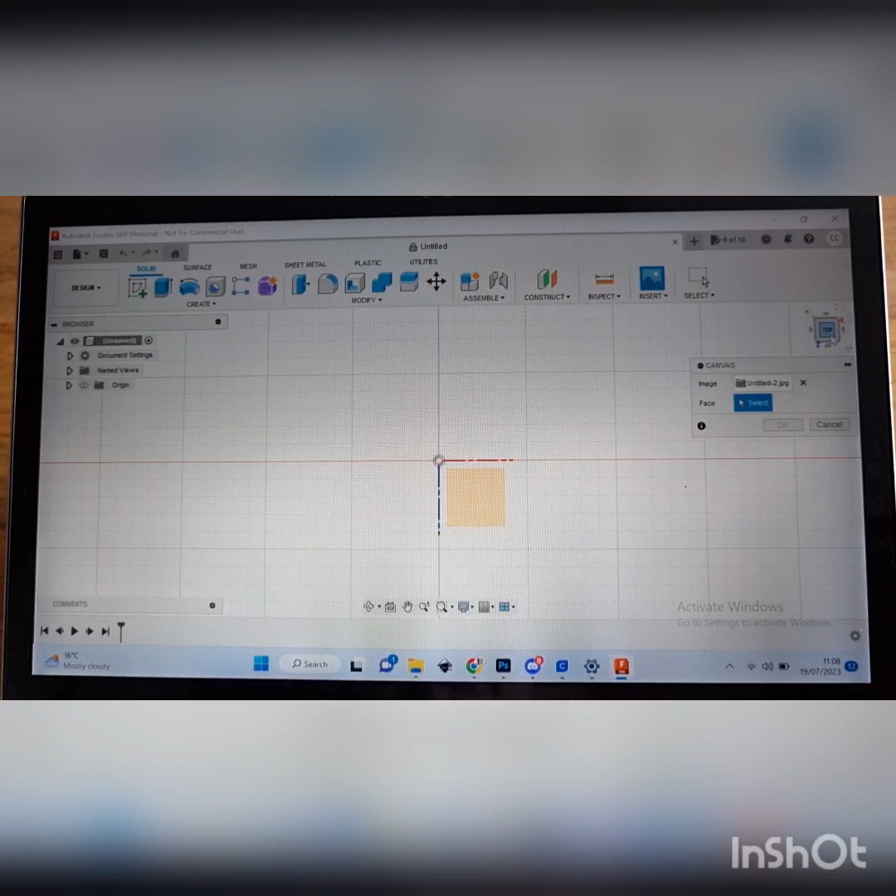Now the first thing that pops up is this canvas dialog box, and we need to select a plane, which is this orange square here. The reason I went to the top of the cube at the very beginning is just to make this step easier. So we press on that one and it does drop it in here.

We don't need to worry too much about the size just yet, but I like to make it big enough so we can see what we're doing, and we can perhaps rotate it 90 degrees so that it looks like a leaf, and select OK.

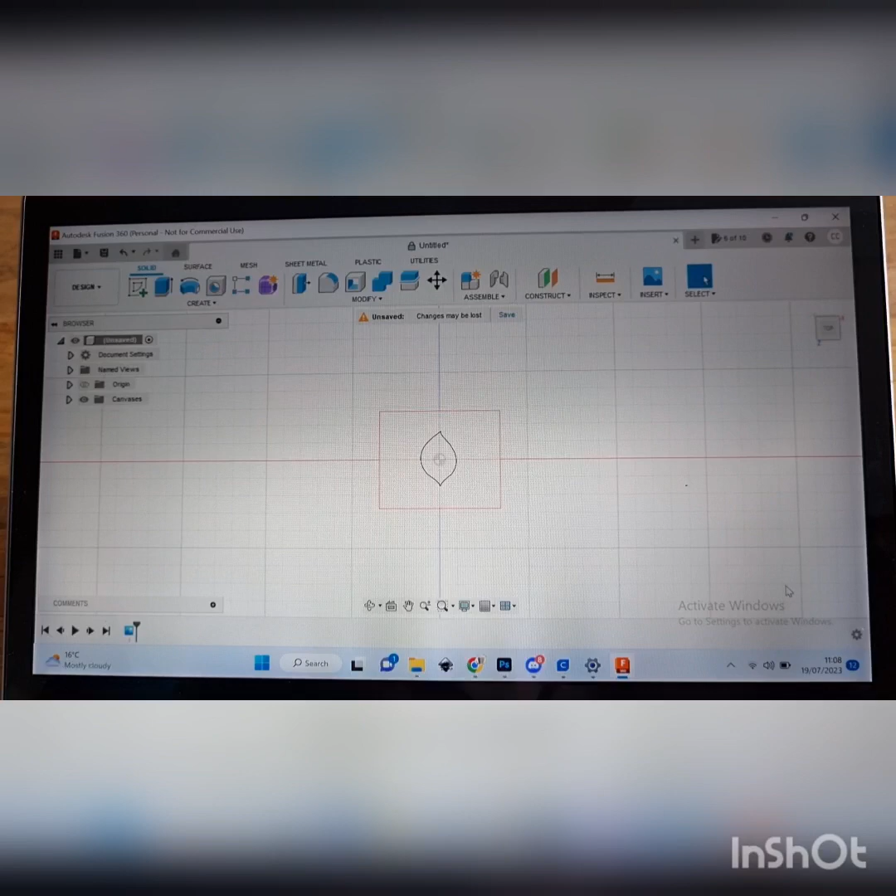We can scroll in using the mouse button, but you can see it goes off the page. So if you need to move something around, you can go to this little hand symbol, select that and pan, and you either click off onto the screen to get rid of the pan, or you can press escape.

The next important part I find is actually calibrating the size of this. Fusion is quite tricky to resize things, so I like to do it at this stage. If you know this particular leaf you want to make, say, 35mm long, there is an easier way to do that in the canvas section before we start doing any drawing.

So just on this left hand side we click the little arrow next to canvases, and you can see we've got Untitled 2, which is our leaf. We right click on that, calibrate, and then you get a little crossbar here.

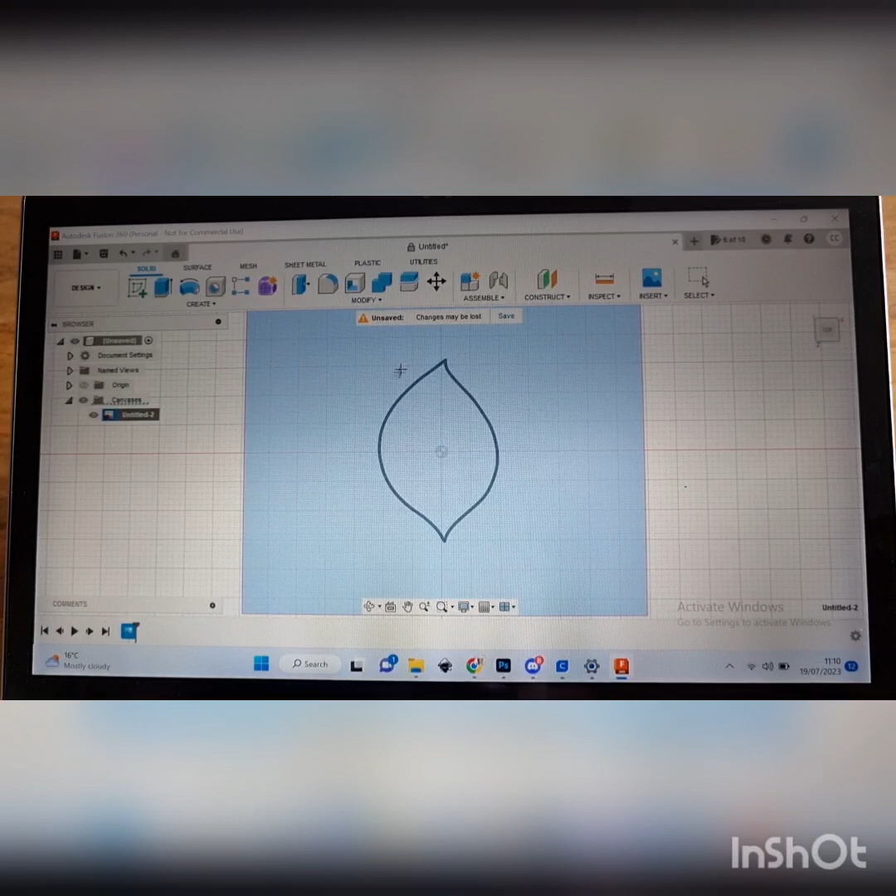So you pick the top with a click of your mouse and the bottom, and at the moment it's saying 31.68 blah blah blah millimeters. So for this tutorial I'm going to say we're going to make this 35mm tall. All you do is type in 35mm, press return, and hey presto, that's your size.

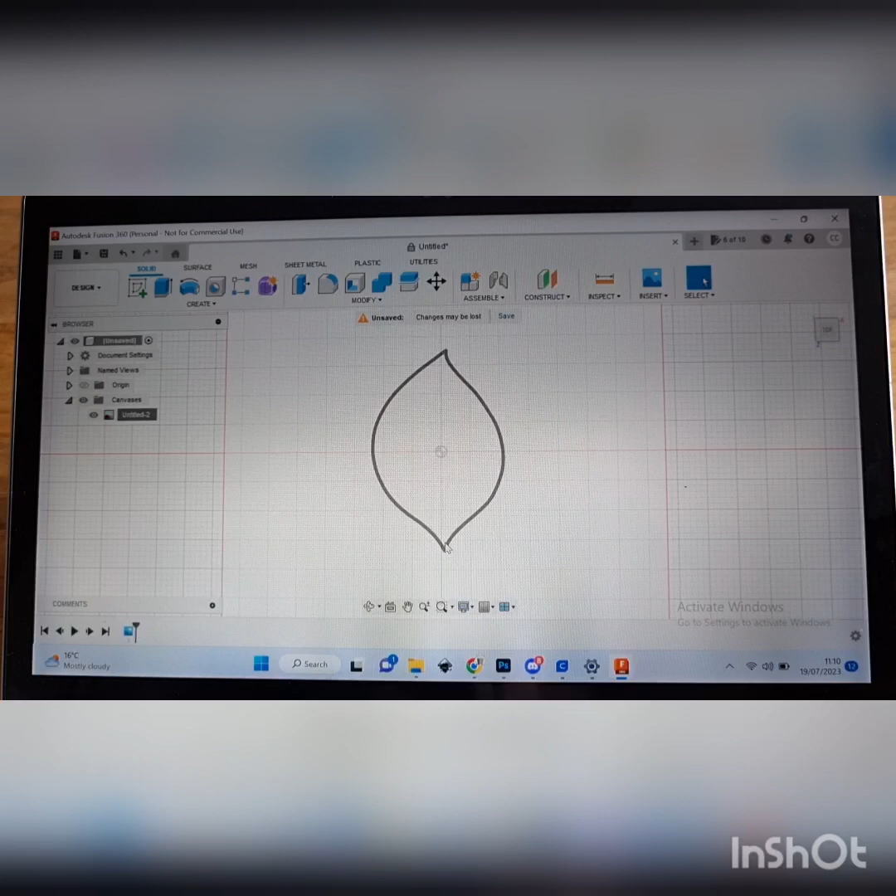The next bit's the fun part. This is where we do what Fusion 360 calls a sketch. We need to go up to here where it's this little box with the green cross, and select that. Again, it's giving you this little orange box.

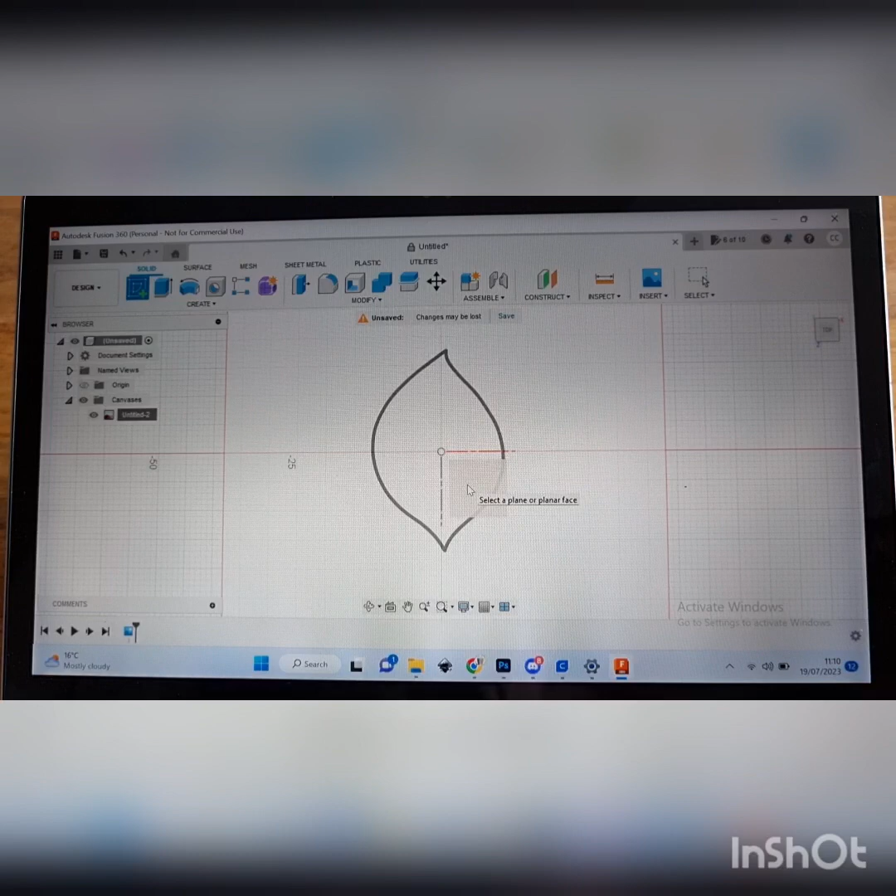This is the plane we're going to be working on. It's a bit like a layer, if you guys are familiar with that on perhaps Photoshop or something like that. But for the purpose of this video, we're just going to select this plane, which means we're going to be working on top of this leaf drawing.

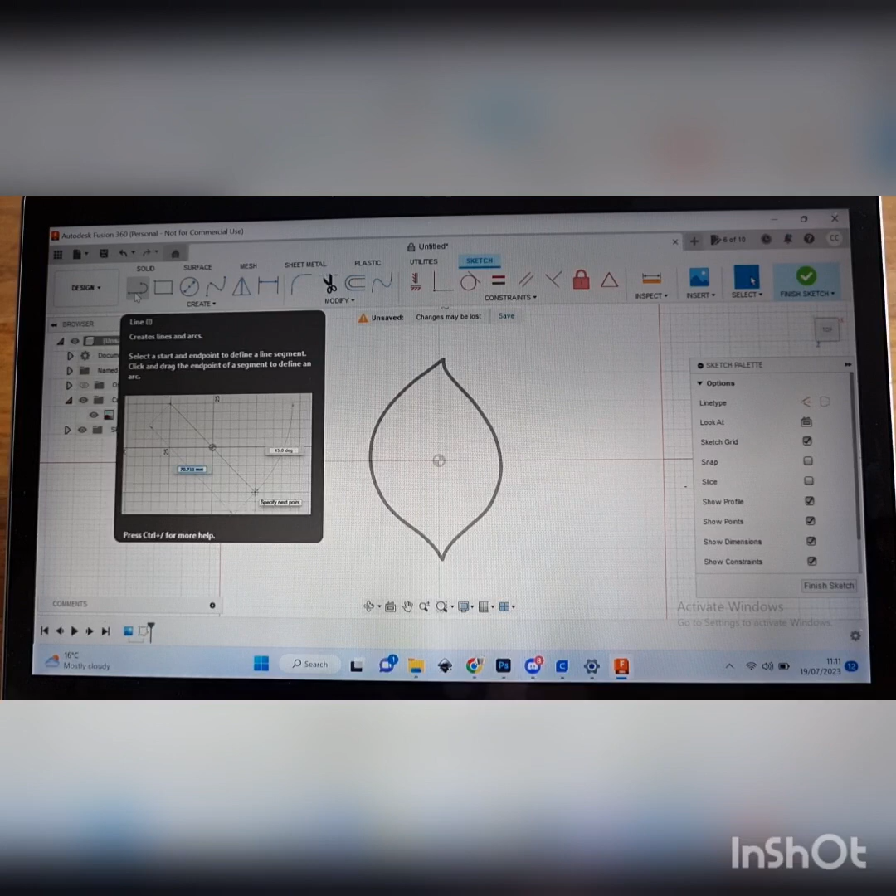Now you do have a sketch palette, mine has disappeared for some reason, so we're going to click on those arrows, and this is our sketch palette, giving us a few options. If we head to the top left here, you'll see we've got a line, a box, a circle, a fit point spline, which we'll be using in a moment, a mirror, which I'll go into, and the sketch dimension, which I don't personally use very much.

For this one, we're going to choose a fit point spline. This is what you would do for any kind of weird curves or anything interesting like that. So select this one.

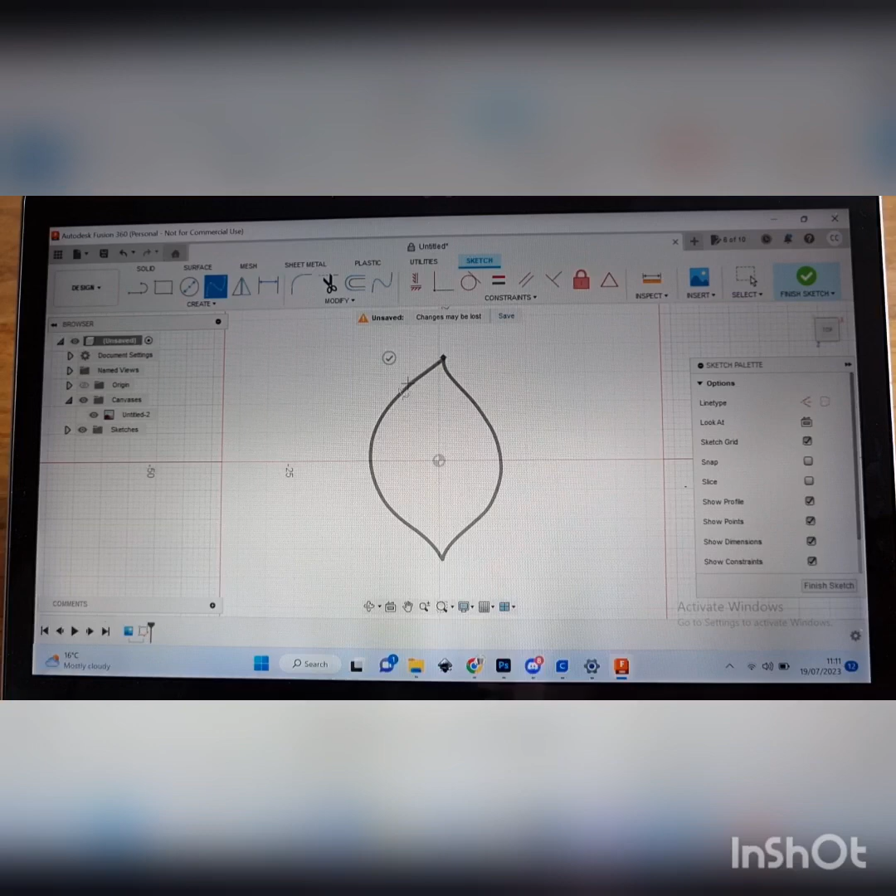What we're going to do is head up to the very top and press with our mouse to do one point. It depends which way you want to go, let's go this way to the left to start with. What you want to do is click and trace the outline. You'll probably see that it's curving as you go, so try, anywhere there's a curve like there, to go in the middle of it because then it will bend backwards.

Scroll in if you're struggling to see or it's doing anything silly. You can adjust these in a moment. So when we get to about this point here, we're going to double click with the left hand mouse, and that's going to stop our fit point spline.

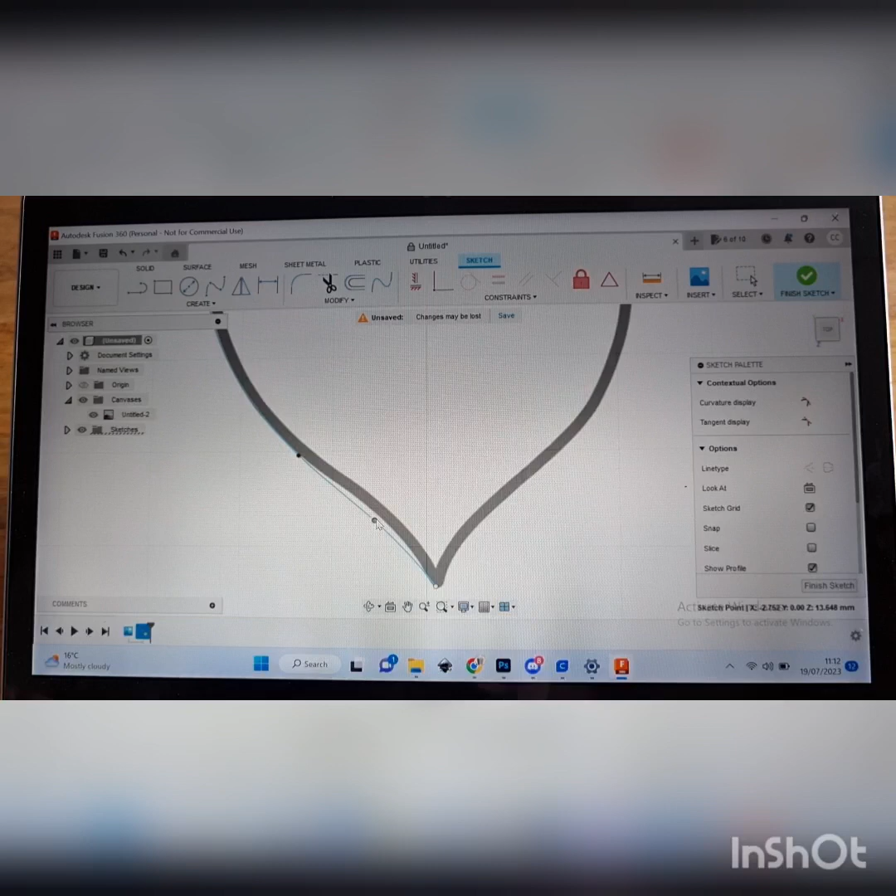If we press escape at this point, you can grab and pull these about a little bit. Again, use the pan tool if you need to, just to see.

Escape to come away from the pan tool, and maybe just drag that a little bit to get that perfect line. Okay, we're happy with that. Escape again to get rid of the pan tool. So we need to do another one for the other side.

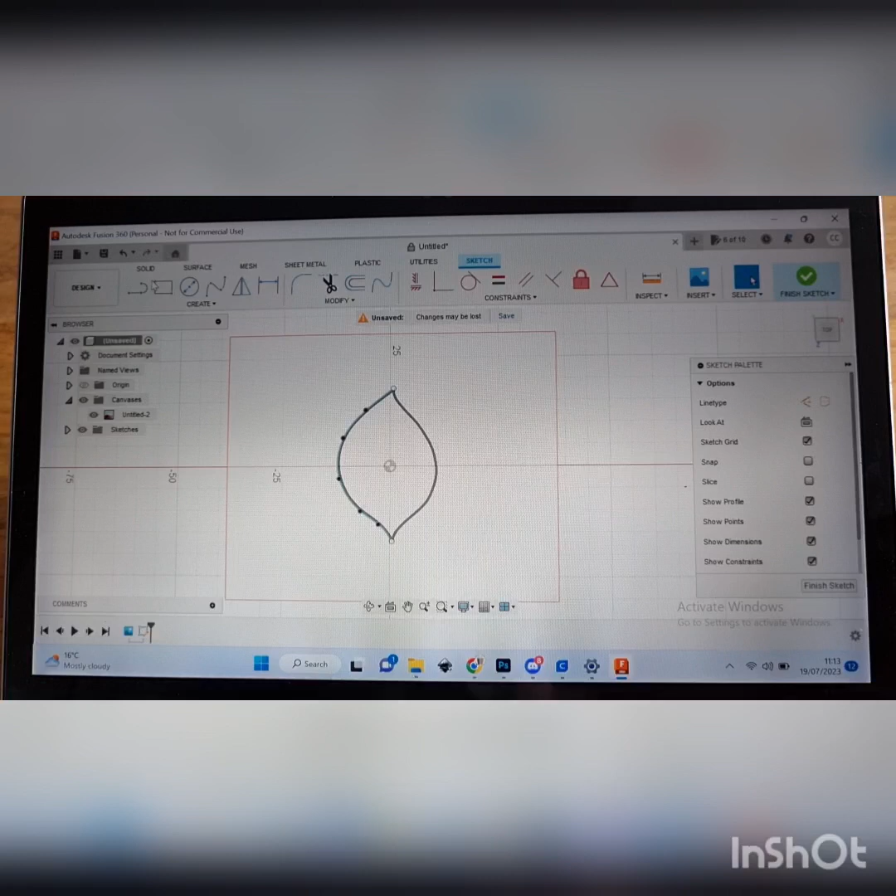But just before we do that, I want to mention you can do a mirror if you wish. If we use the mirror option, it won't trace the canvas exactly, but it will make it symmetrical. For this purpose, we can choose the line, and it will snap to this little centre point, which makes it a little bit easier. So I would go from here downwards and just click till you have a solid line, and escape if it tries to draw another line.

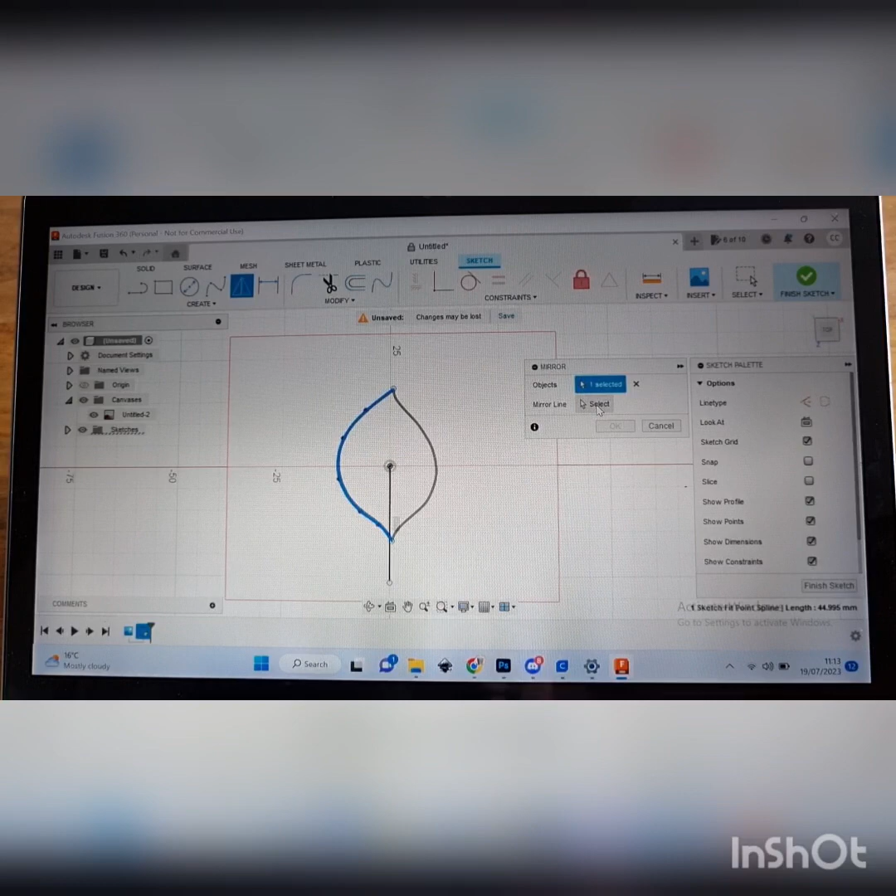Then we can choose the mirror function, select the object, which is the blue wavy line we've just drawn, and the mirror line, which is the black line. If we just hide the canvas, you can see it's drawn this leaf shape. At this point, you could have pressed OK if you wish, if you're happy with that. We could trim off those two funny bits at the top and bottom, and that would be your leaf shape complete. But I'm going to cancel that.

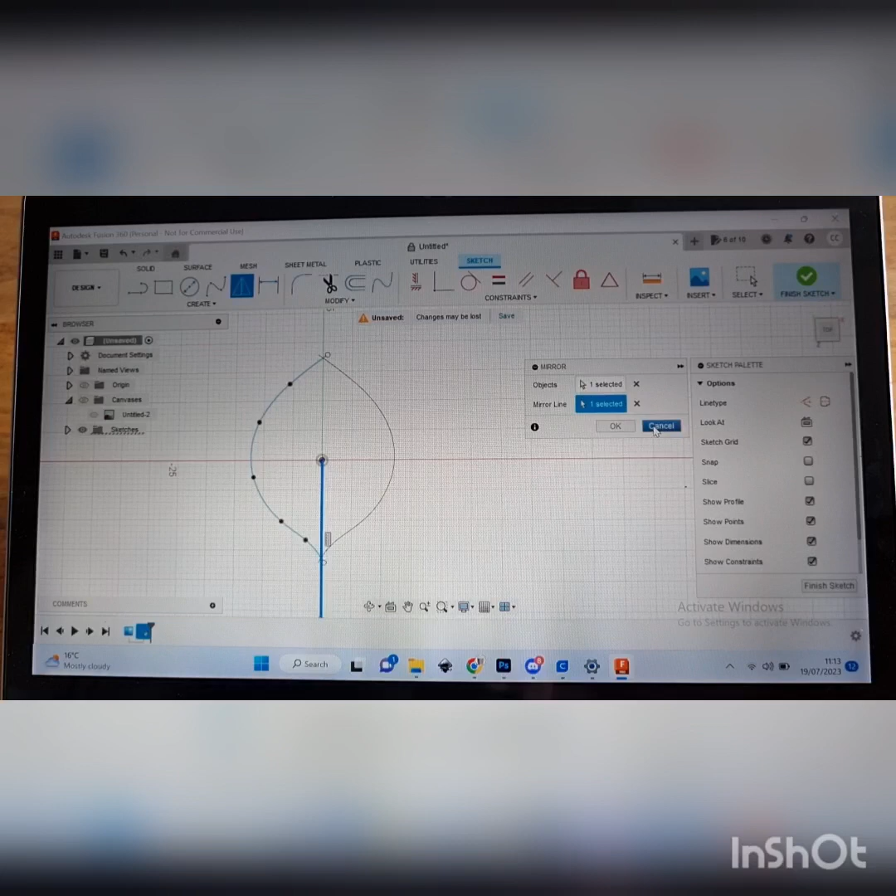And what you can do is press Ctrl and Z if you want to go back a step or several steps.

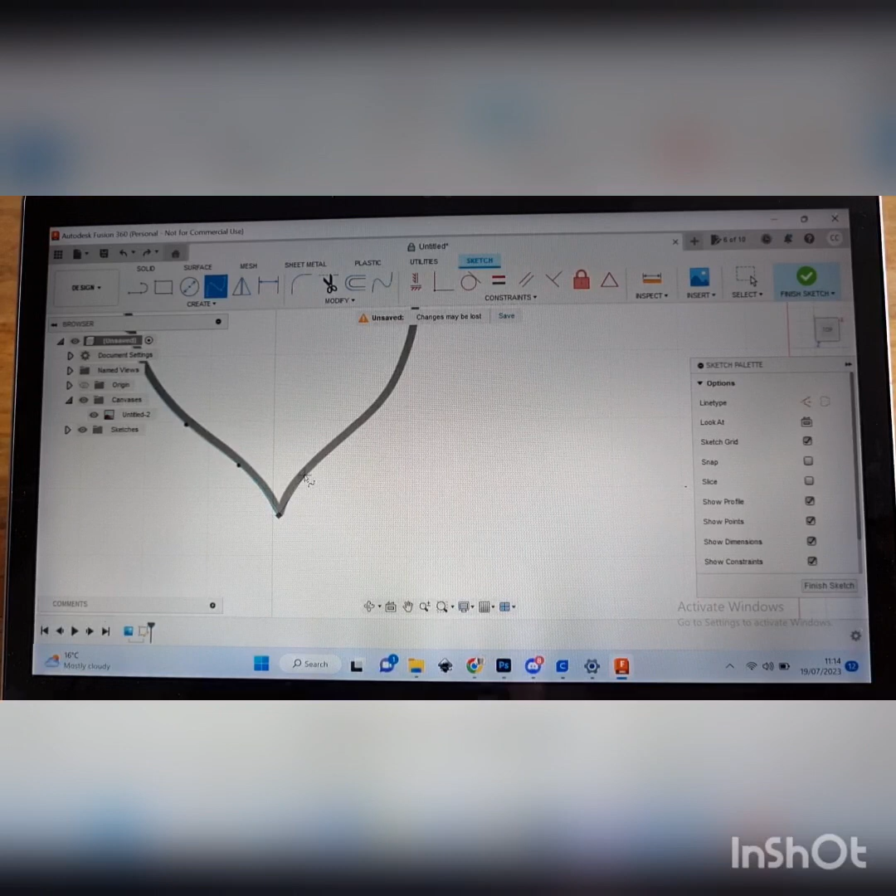So we're going to continue on with this funny leaf shape. Again, we're going to choose the fit point spline, and go back to this white blob here, and it will snap to it because that's where we started from. You can click on that, and again we can start working our way around that shape.

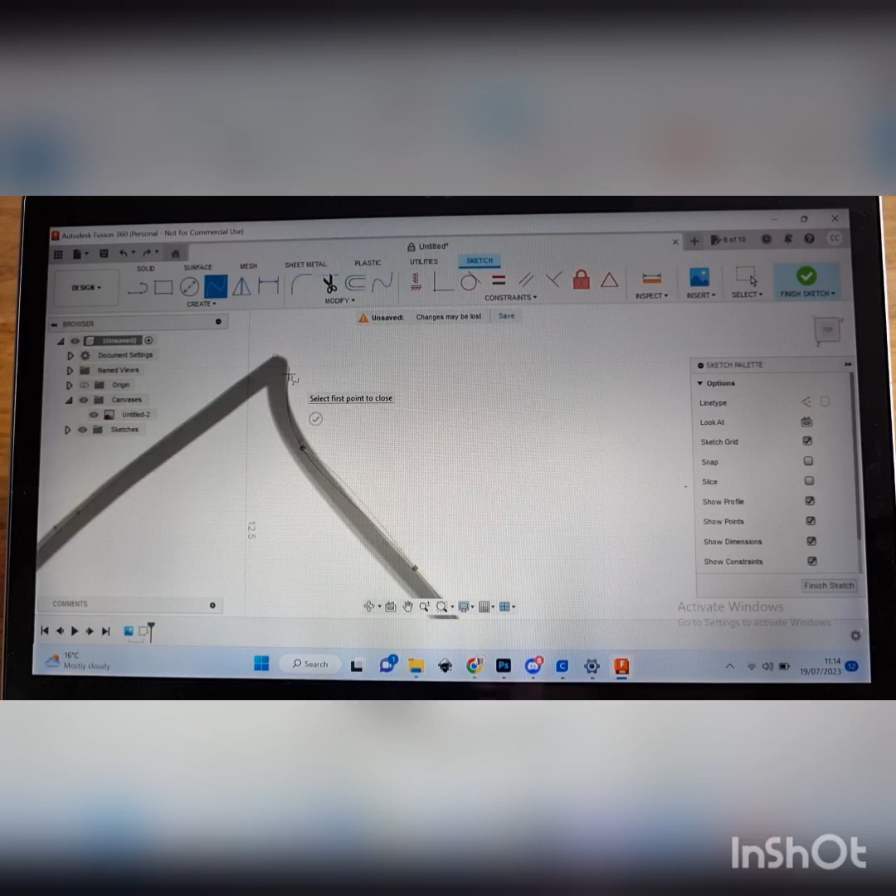You can still move to the pan tool and escape out of it if you can't find where you're going, and sometimes you need to drag it quite a long way to get that curve. If it's a long piece, or a short bit like this, you might have to fiddle about with it. It doesn't actually matter if it goes a little bit off the line, it's not the end of the world. But when you get back to where you started, to that little white dot, you can double click, and that gives you your line.

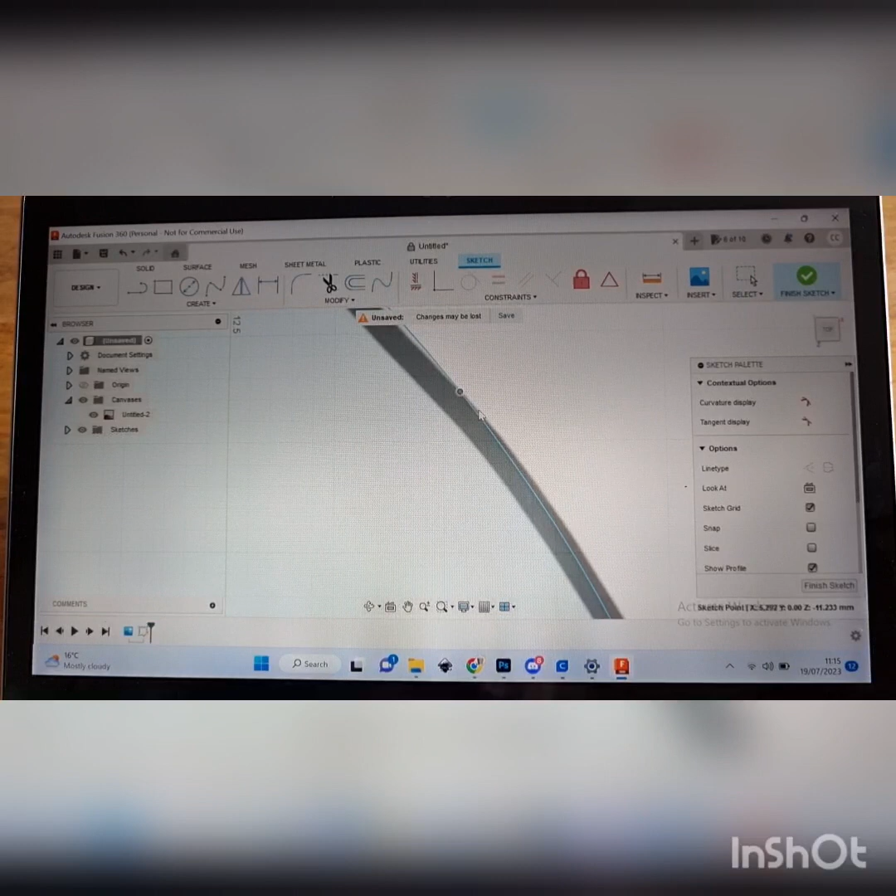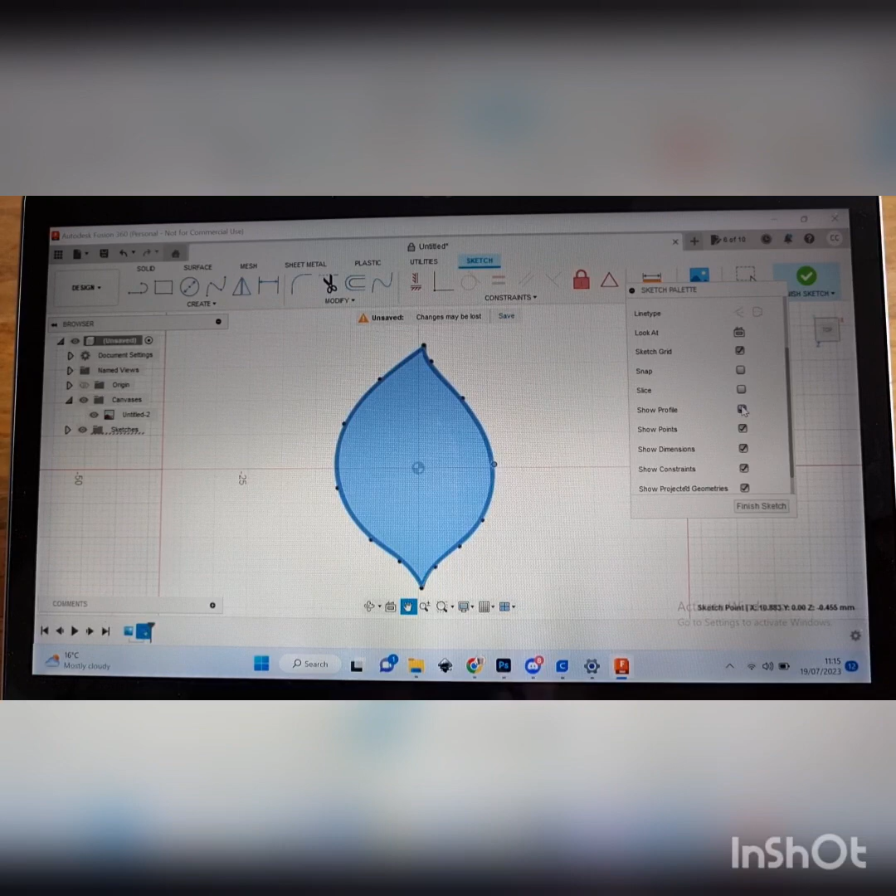If we press escape, we can go to that node and start adjusting our shape, making sure we're happy with it. You might need to drag them a little, or faff about a bit to get the shape vaguely where you want it. You'll notice it turns blue as I hover over it. That is because the show profile box is ticked in this sketch palette, which is really handy sometimes but not always, and we'll go into that in another video.

So I can press escape at this point, and we can also hide the canvas, and this is our shape. If you want to see it without the little black dots, you can untick the points box, and I think that's quite a nice little shape to deal with.

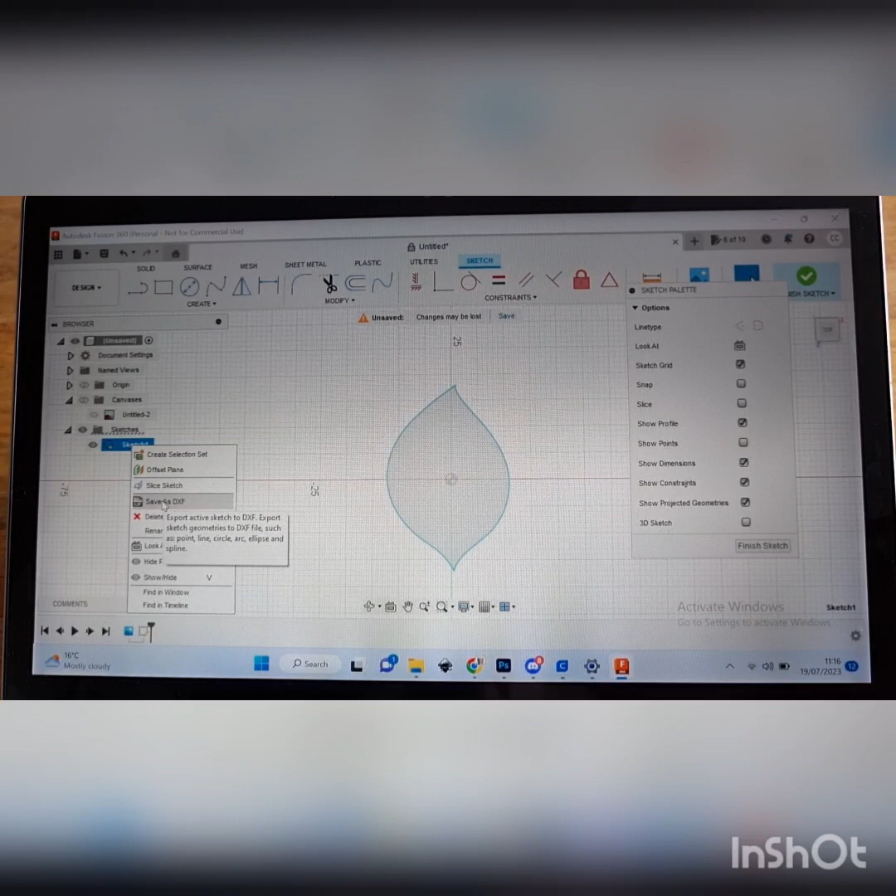So that's it for the shape, apart from one thing. Now this is the most important thing. You need to open the sketch palette by pressing that little triangle, and right click on sketch 1 and save as DXF. This is by far the most important thing you will find if you ever want to reproduce this shape, or make another one that's smaller or bigger. This is absolutely crucial.

So click Save as DXF, and you can give it a file name, Leaf1. Put it wherever you like on your computer, perhaps make a sensible folder for it, but save that as a DXF, because if you ever want to make it bigger or smaller, like I say, you are going to need that shape. But today we're just going to make this one.

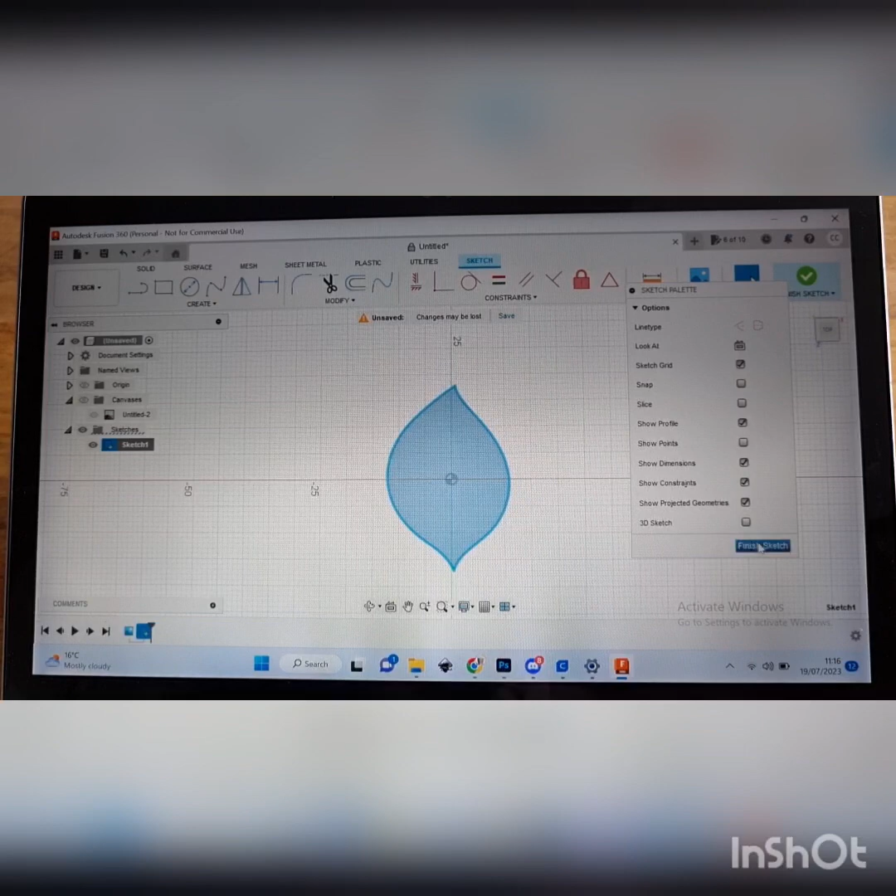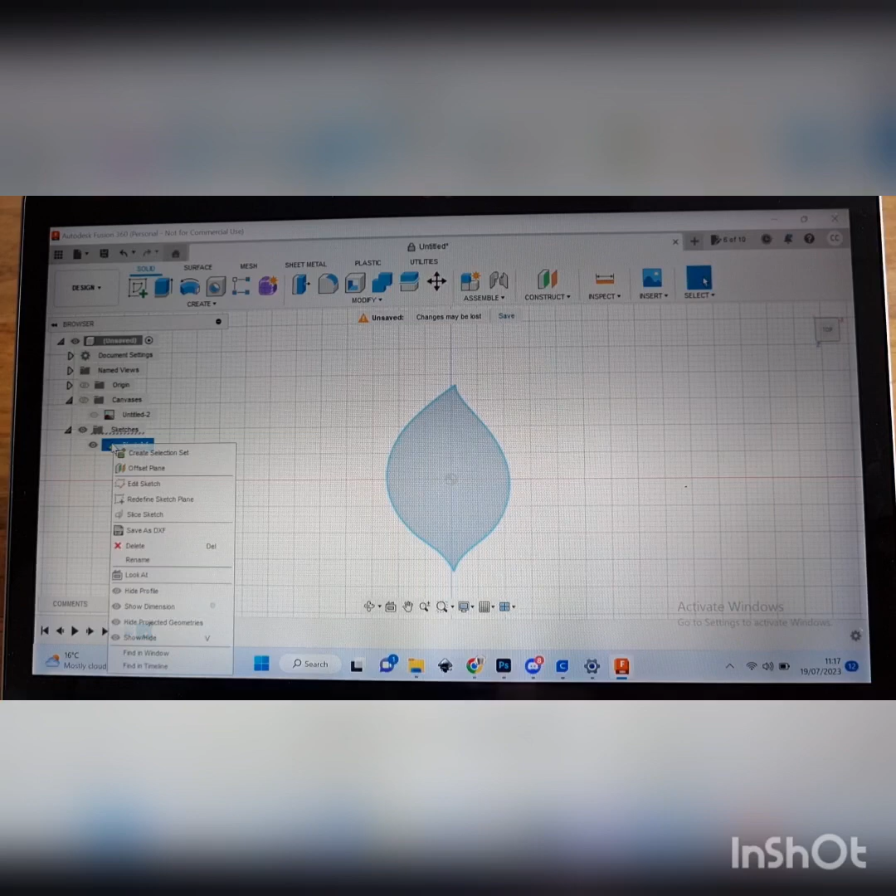Now if I've pressed finish sketch, you'll notice all of my little tools have disappeared, and you think, oh, I want to go back and do something. What more can I do? You need to go back into the sketch, so right click sketch 1 again and edit sketch. Sometimes for some reason this menu doesn't come up, so if it doesn't, press the little eyeball twice and do it again. Don't ask me why, it's just something I've found.

So we're going to use a new tool. This is how we create the walls. Now I like to do 3 walls: the cutting blade, then a wall to support that, and then the base. So I use the offset for this.

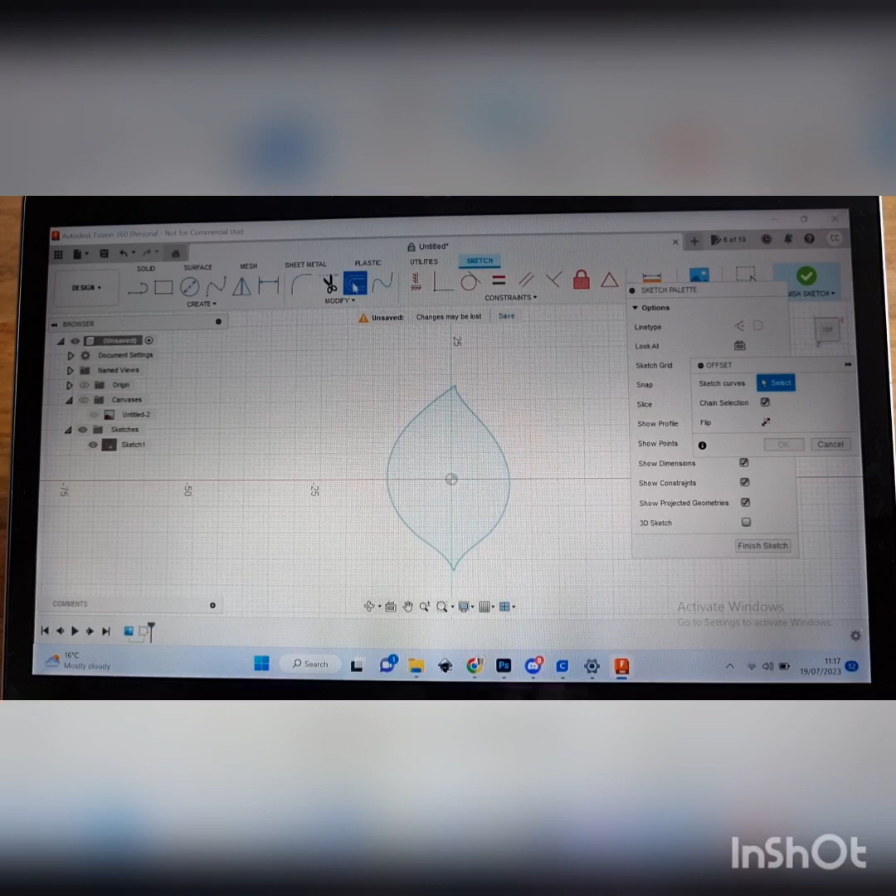Click offset, and if you select the outer line you've just drawn, with a bit of luck it will give you this red line around the outside. If you want to change it to the inside, by all means you can, but I like to go all the way to the outside on this particular type of cutter. You'll also notice it's 1 mil here. I make my cutting walls 0.4 mil.

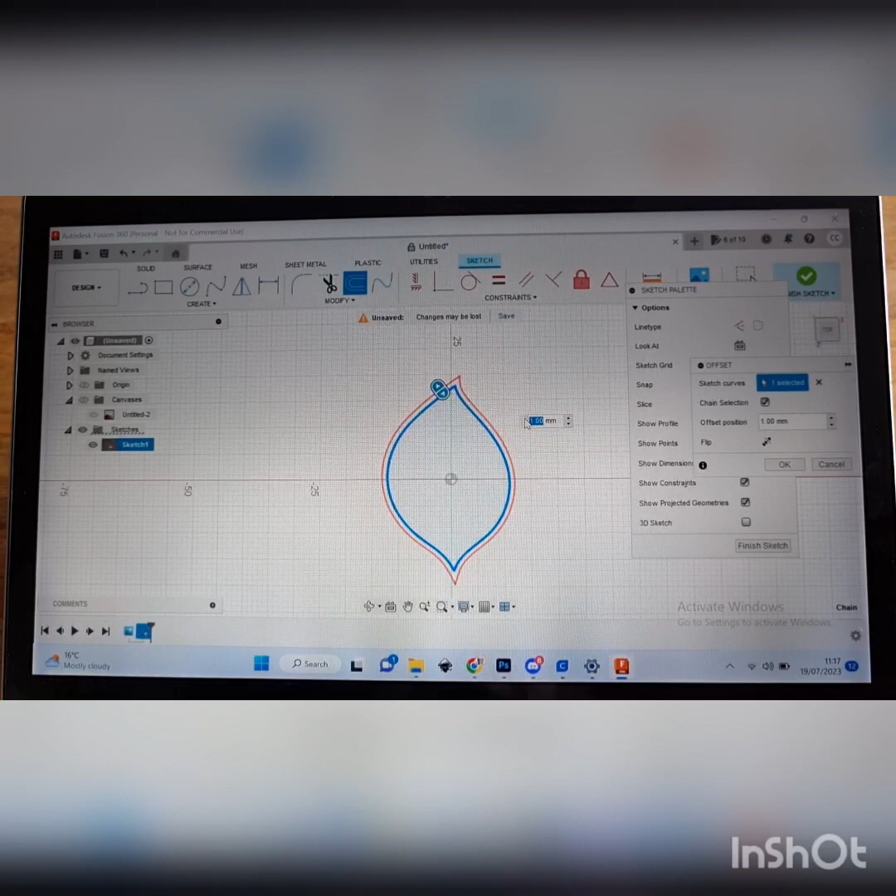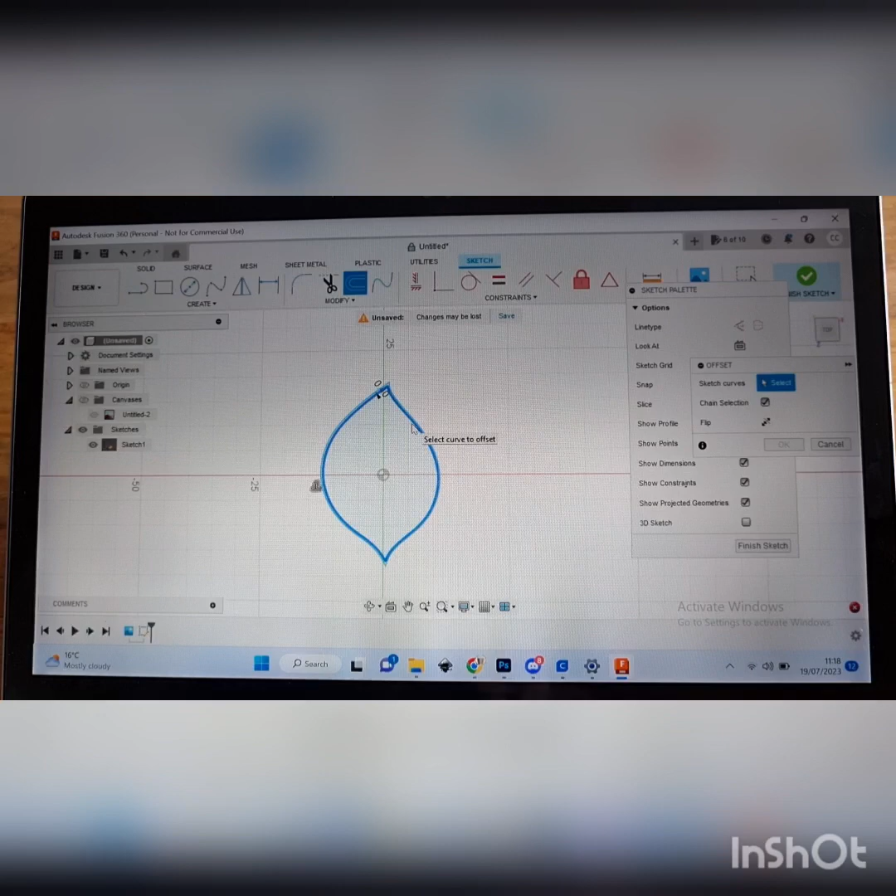Press return, and you can see it's put this tiny little wall. The next thing we need to do is go to offset again. Now, unless you've changed the outer wall, it gives you an error and says you can't do this. So we have to go from the inner wall again. So select the inner wall. This time I'm going to say 1.2 mil, to give you a little bit more room.

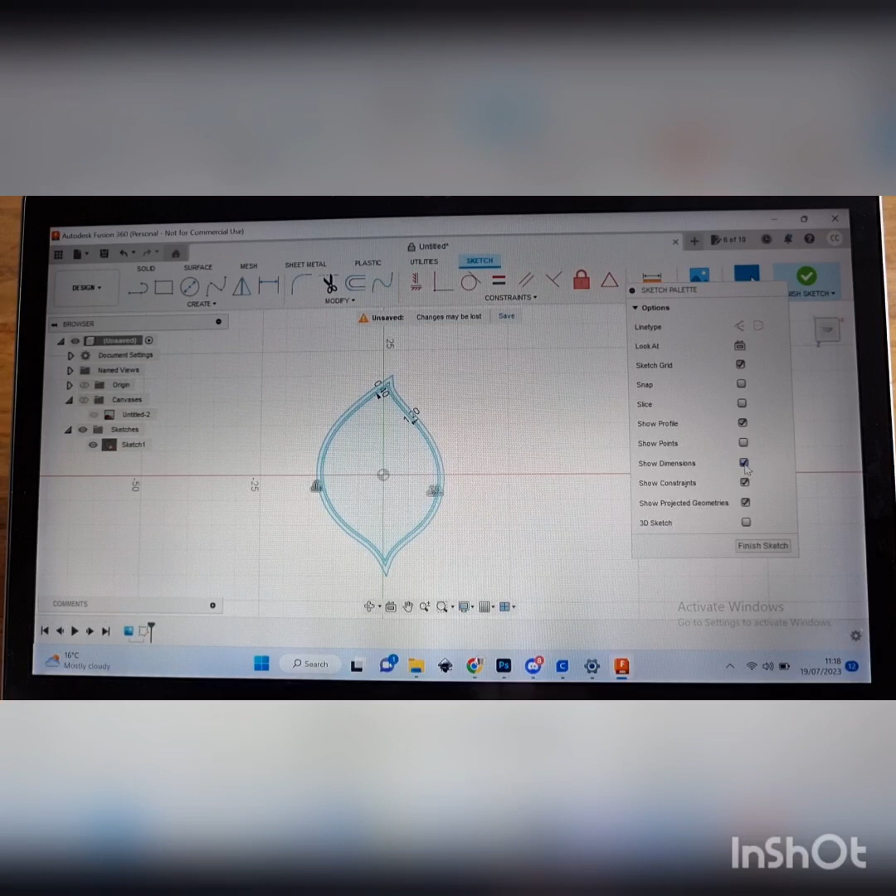You may notice we're getting all these irritating little blobby things and numbers - this is dimensions and constraints. We don't need to worry too much about these, so I'd suggest you turn them off using this little palette here, and just untick show dimensions and constraints, because it's too complicated to really explain right now. Just trust me, get rid of them.

The next thing you might notice is we've got a really sharp corner on these walls now, because of the shape of the leaf. So I like to do what's called a fillet.

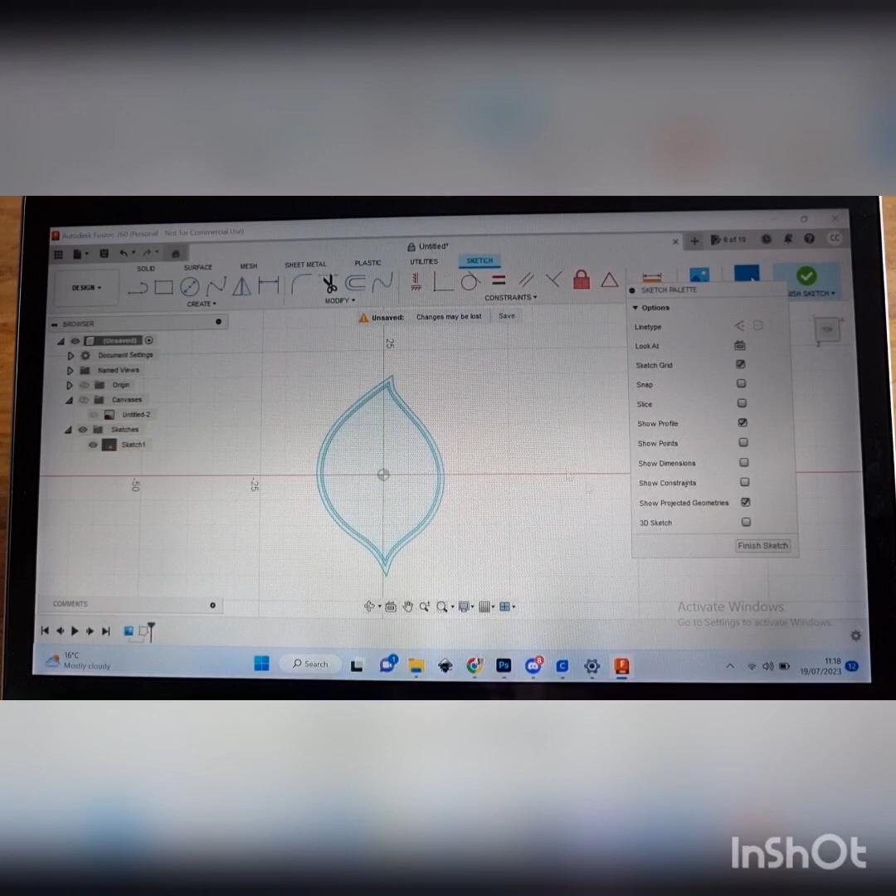So we go up to this little arch here, and I'll scroll in a bit to show you this. When you click on that point, you can see where the red line is - don't panic too much. You can adjust the fillet, so I like to go to perhaps 1, and you can see it's made a nice little curve there. So let's go with 1.

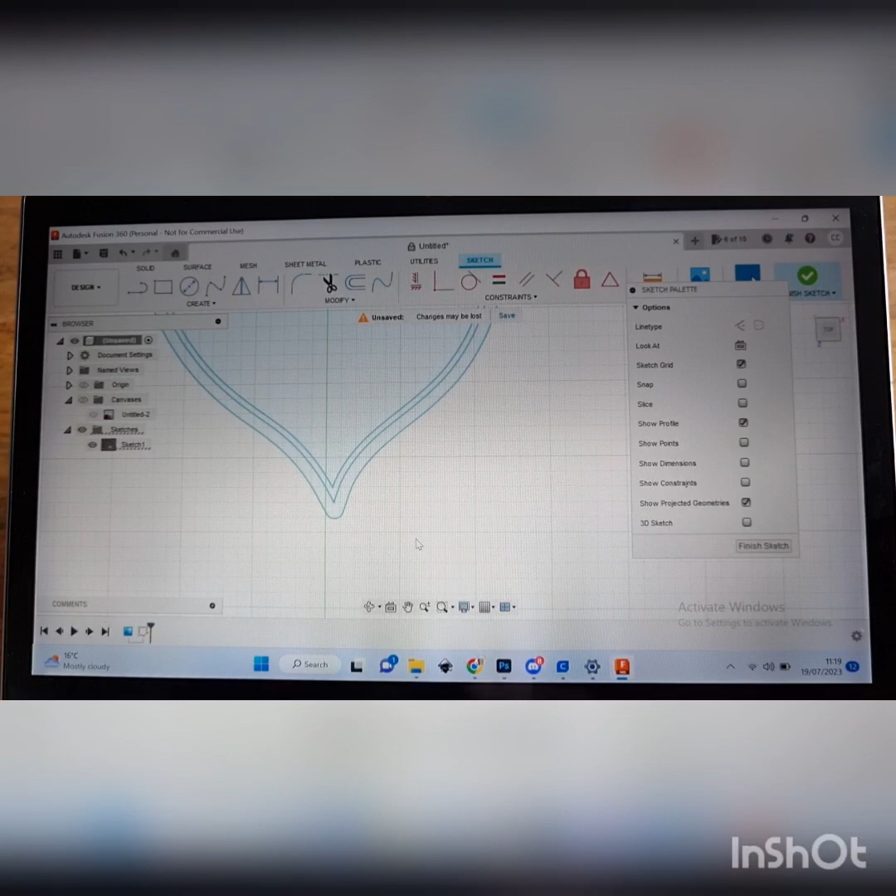Perhaps not, maybe that was too much, so Control and Z to get rid of it. Fillet again, we'll try 0.6 for instance, and that looks better.

So that's just rounded off that little top sharp piece. We can do the same at the bottom here. You can also drag this if you wish to show what sort of shape it's looking, but I like to say the same both, so 0.6.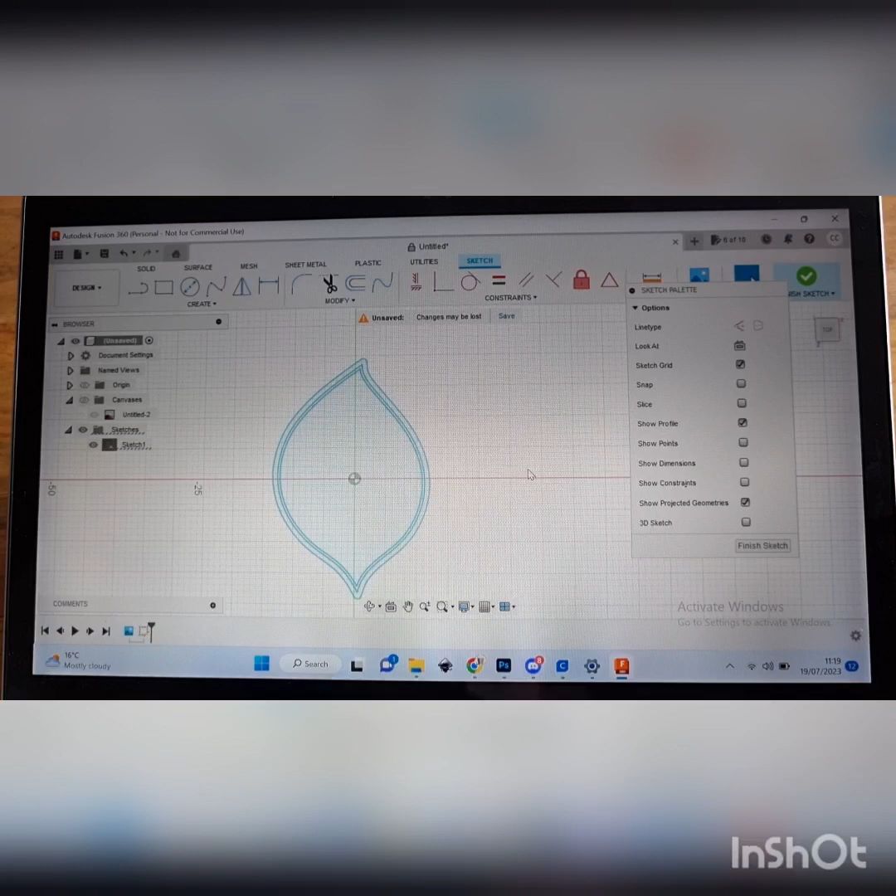Now, as I mentioned, unless you've changed the outer wall you can't offset it, but this one we've just changed, so this time we can offset that. And this is going to be our little base, so click on the offset wall, and 1mm is about right, so I'm just going to press return.

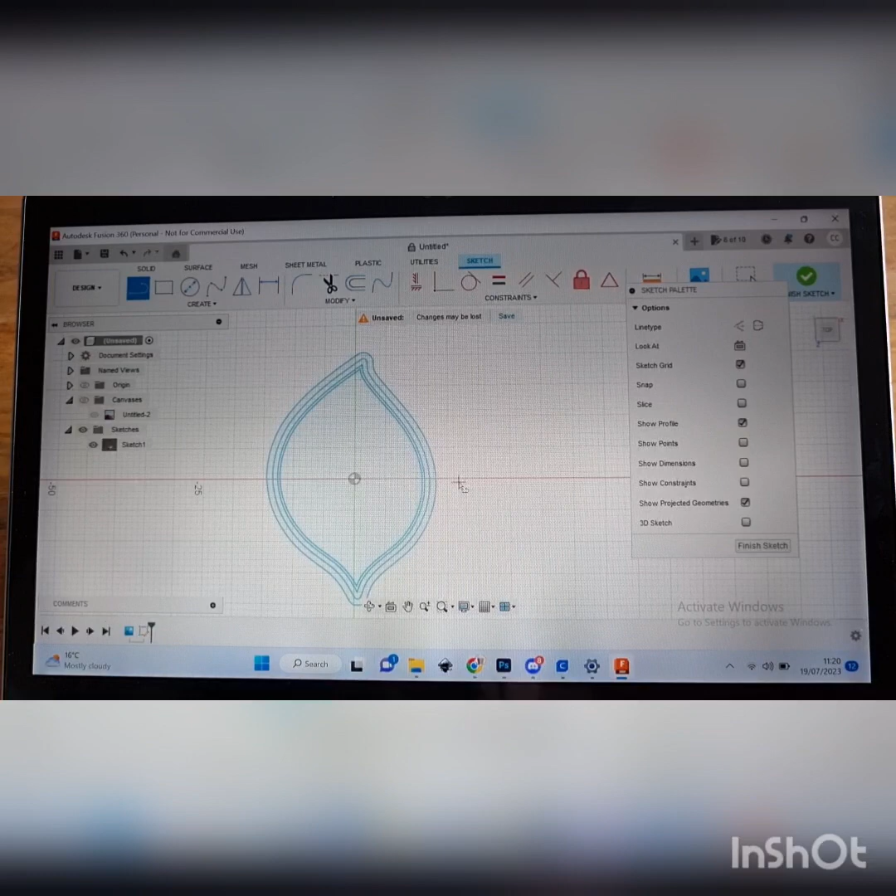So this is our basic shape. At this point, I want to make sure you realise it will need some structure too, because if you were to squeeze this that way, it's obviously going to be a little bit rubbish.

So if we scroll in, we can use the line tool, select somewhere on that wall, pull it across, and when you hit the other wall, double click. And we'll do that again.

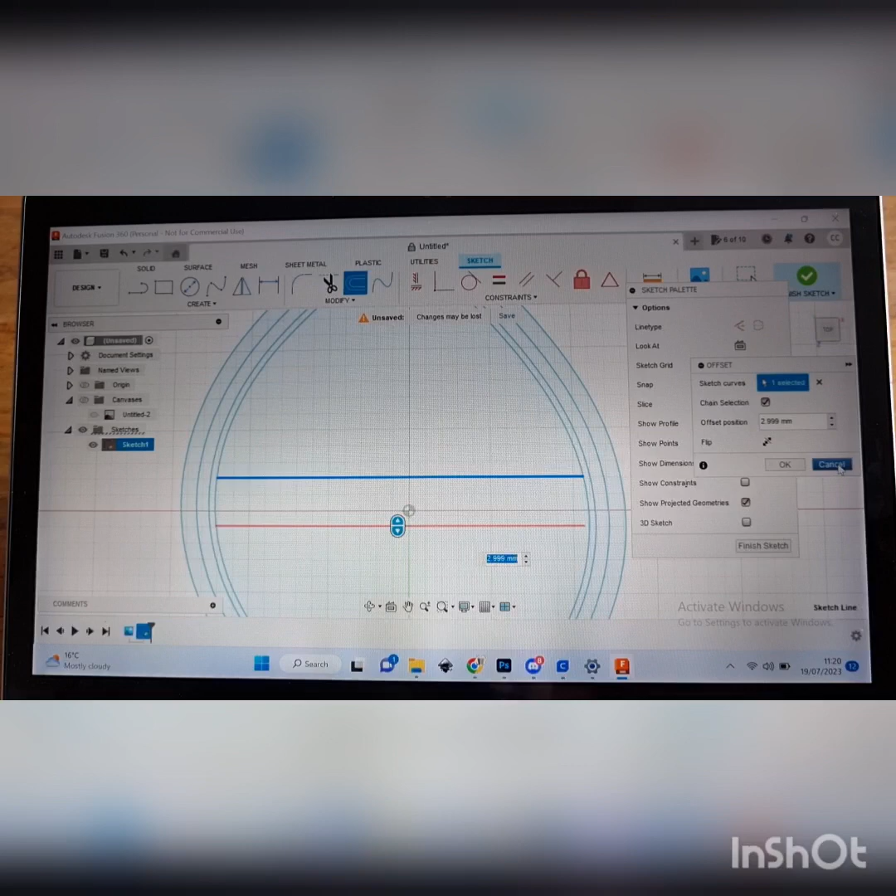If you want to offset, if you definitely say, right, I want 3mm, we can do that, but what's going to happen is you'll have an overhang here and a little gap there, which is a little bit too much of a pain, so we'll cancel that.

You've got to bear in mind that each of these squares, depending on where you're zoomed in, is usually 1mm. You can sort of guess if you want a 3mm bar across the middle, you're near enough.

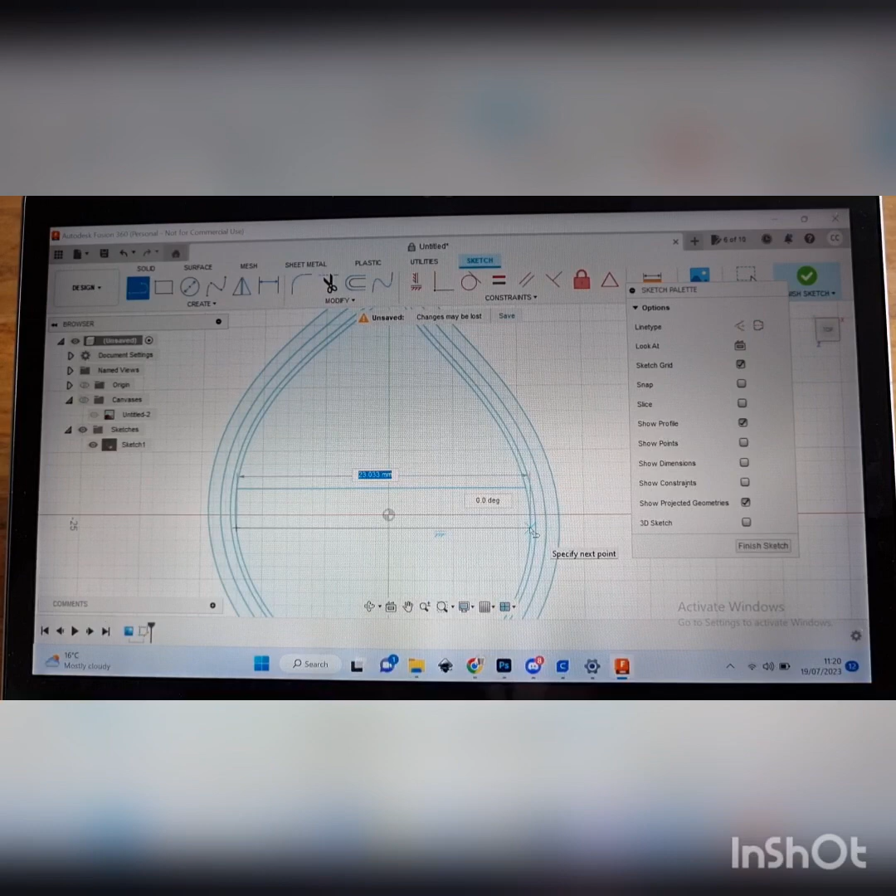So again, click on the side of the wall. That little constraint pops up to say that that's parallel to that, which is quite handy because you know they're not going to be all wonky. So we can double click, and we have finished our sketch, ready to have our walls.

So we can press finish at this point. Now then, how does this turn into a clay cutter, you ask?

The next process we need to learn is this little beauty called the Extrude. Now, if you're still in the sketch palette, so if we go to edit sketch and you're still in here, you'll notice you haven't got any of these buttons. You can't - this is just purely for sketching. So if you want to extrude it, you won't be able to just at this point.

And it's worth noting that some of these things like the fillet, there is a fillet for the extrude as well, which is the solid parts of this program. So we do need to make sure we finish the sketch.

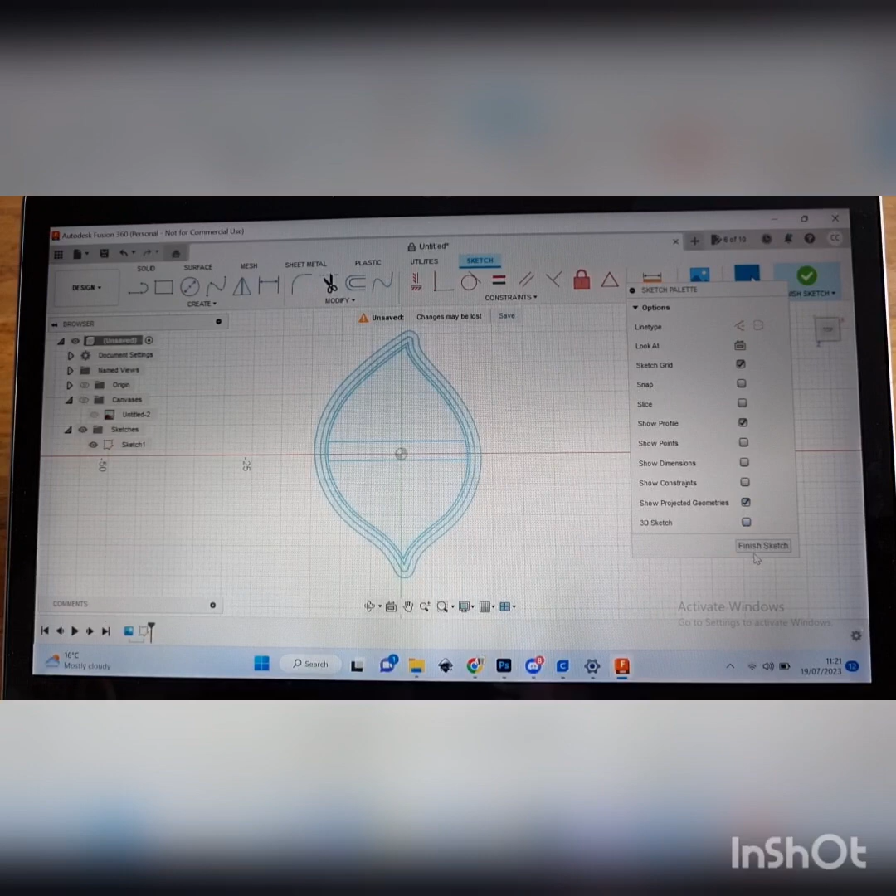So now we've gone back to these little beauties here. We're going to choose the extrude, which is a little cube. I'm just scrolling a little bit and you'll see all the sections are blue, which is good. This means they're all connected, they're solid. If you're having any problems and they're not solid, you've got a hole somewhere and you'll have to go back and fix it.

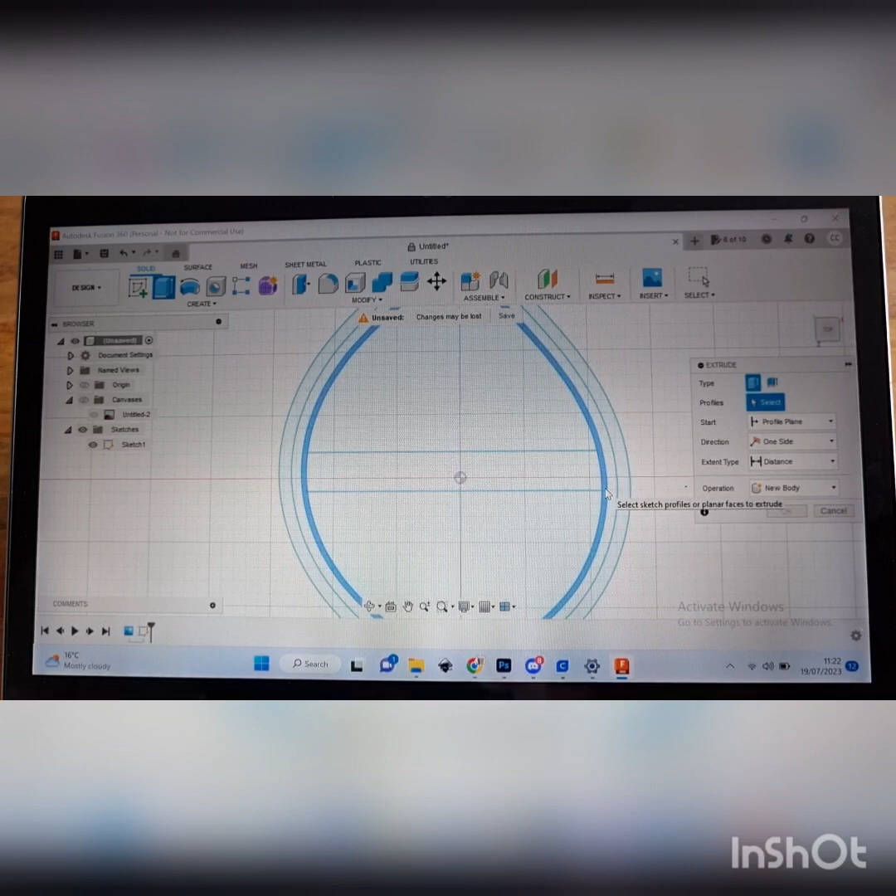But at this point, it should have been a fairly simple shape.

So we're going to choose this inner wall first, and I like to do my cutting blade 13mm tall, press return. Ooh, but look, the whole sketch has disappeared. Don't ask me why, I don't know, but all we've got to do is go to the eyeball and it brings your sketch back.

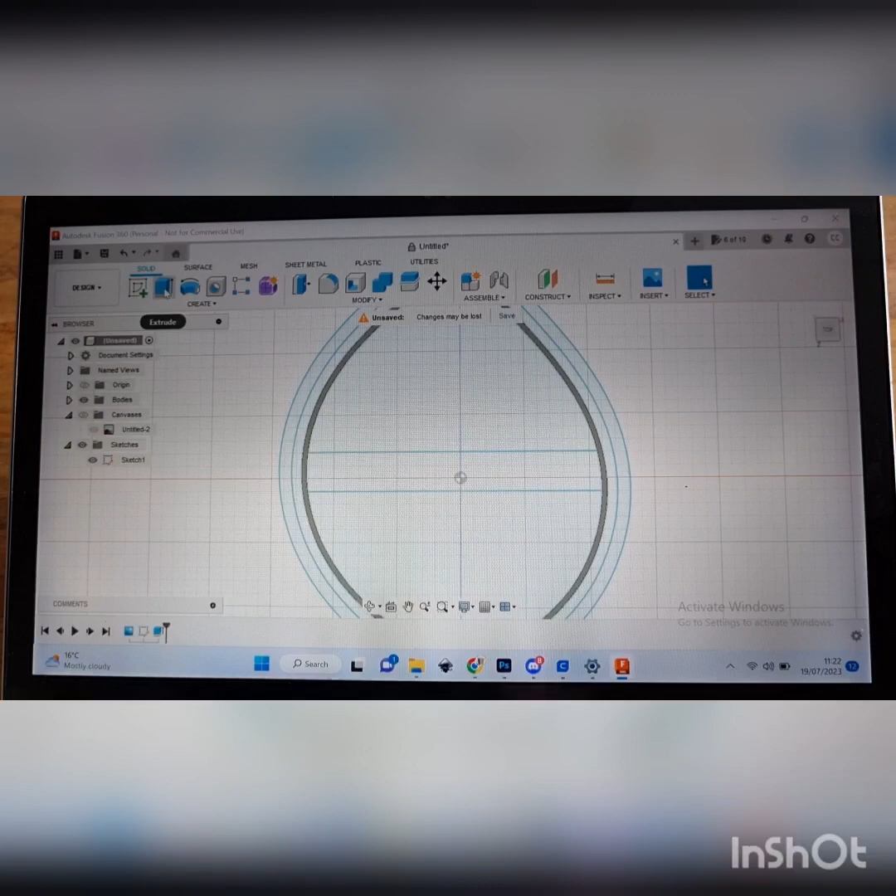So then we're going to click extrude again, and the next wall I like to be 10.5mm, return. And then the base and the little support bar across I usually do as 2mm, return.

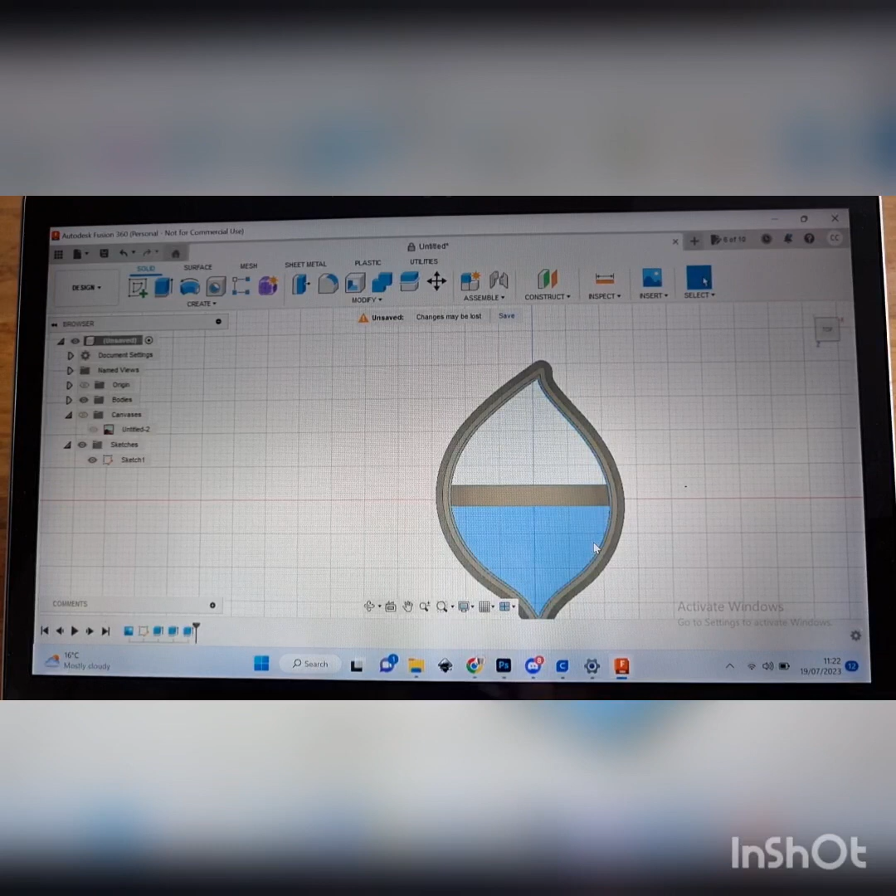But at this point you've no idea whether it's 3D, you don't know if you've done anything strange, so what I do is click the orbit, which is here. Make sure you do have the orbit symbol, and you click and drag and you can see that we have this 3D shape.

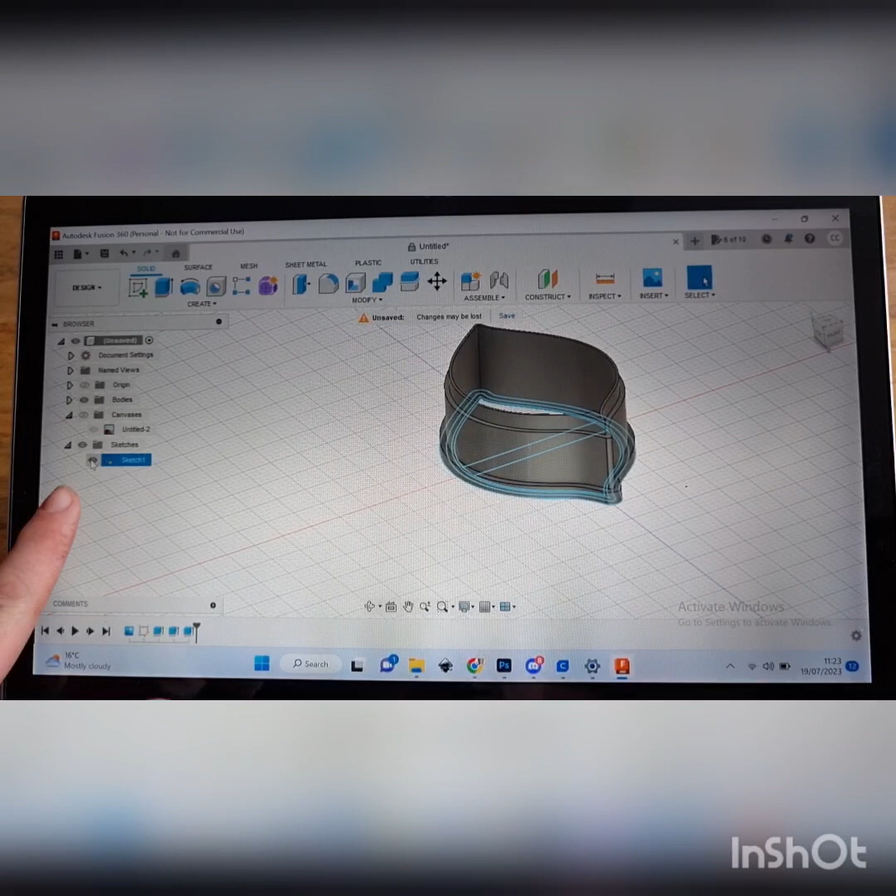Okay, so we're going to escape to get rid of that tool, and I like to get rid of my sketch lines because they just get in the way, so I eyeball that one so that gets rid of them. So we can see now we have this lovely little 3D shape that's nice and secure.

But just for finishing, there's a couple of other things I like to do.

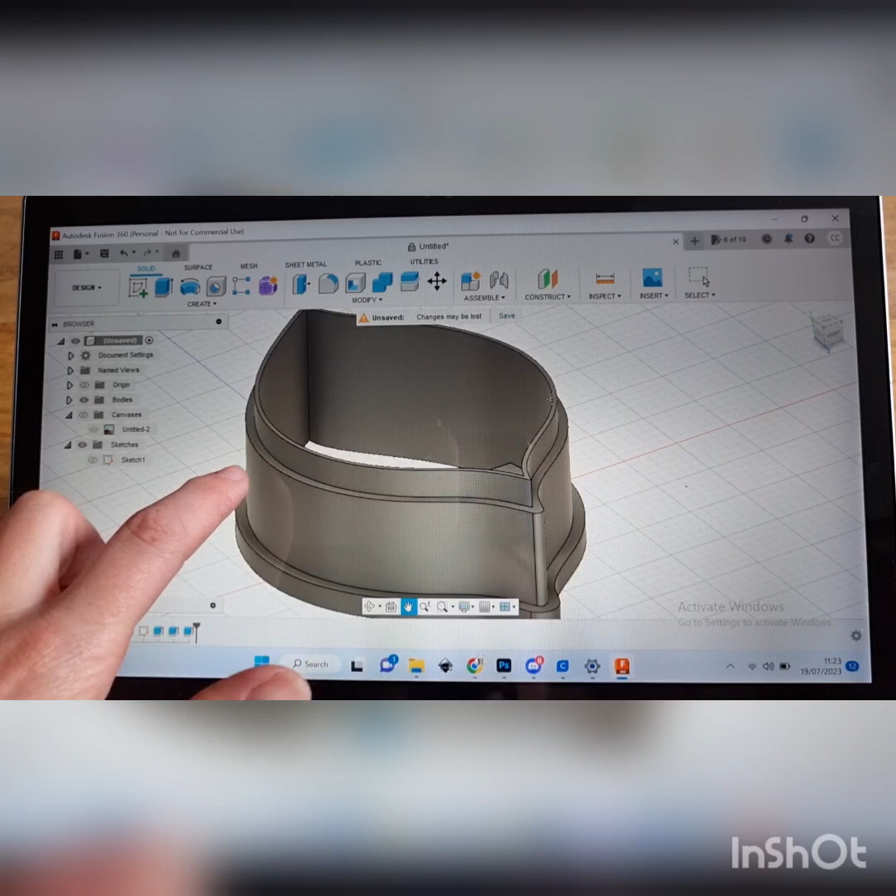I was working with one particular matte filament on my 3D printer when I was first starting, and I found it very difficult because the wall kept breaking between the cutting blade and the outer wall. It kept snapping off, and it did turn out to be the filament. But to try and work around that, I put on another type of fillet. This is a solid fillet to kind of support the wall, and it's just something I've done since, to be honest. So you can see the junction between the outer wall and the inner cutting blade.

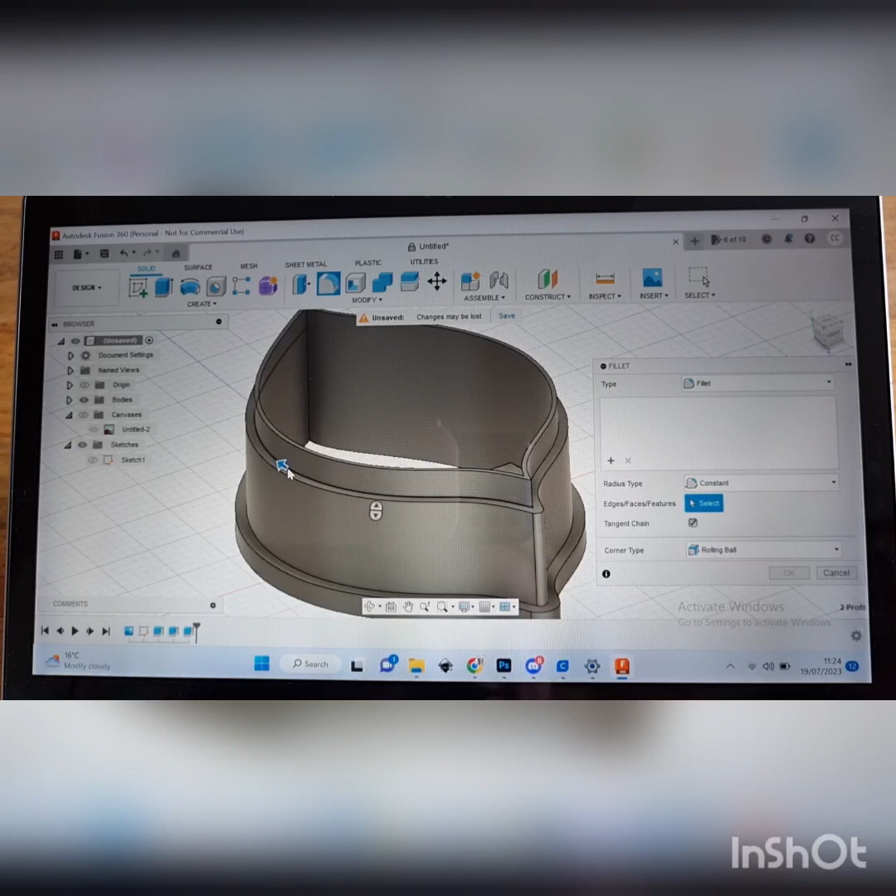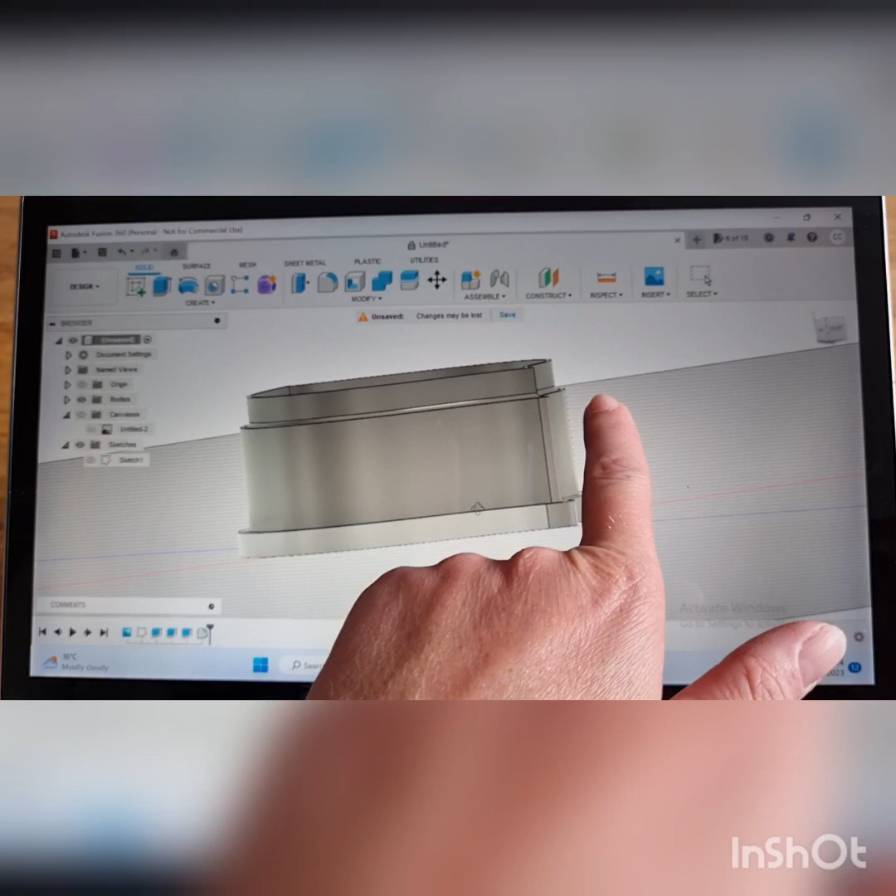I select that and the opposite one. You'll see it draws this black line for you. Now I like to do a 0.4 fillet, and can you see how it's put this little extra section in? That's a curve in like that. Press return. That's number one. So you can see now from the side perhaps this little wall that just helps it a little bit to be a bit stronger.

The other fillet I like to do is on the outer edge of where you actually hold it, because that makes that just that little bit smoother. So we click on that one, and I try and do a 1mm. Now that's interesting. This one's saying it can't do it.

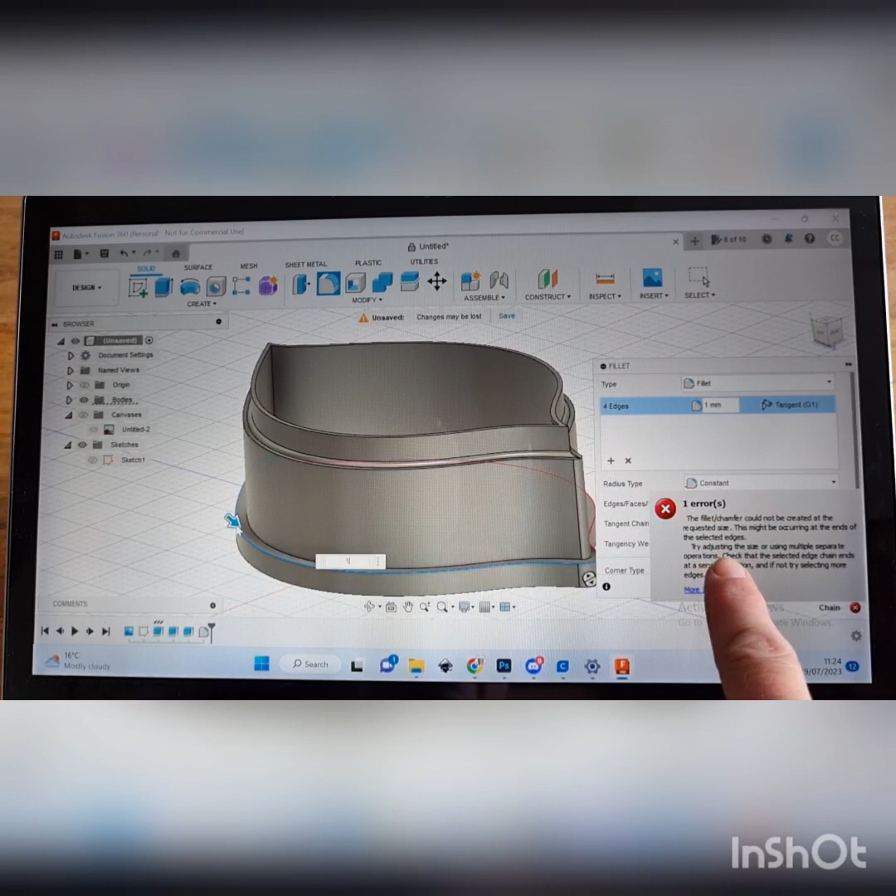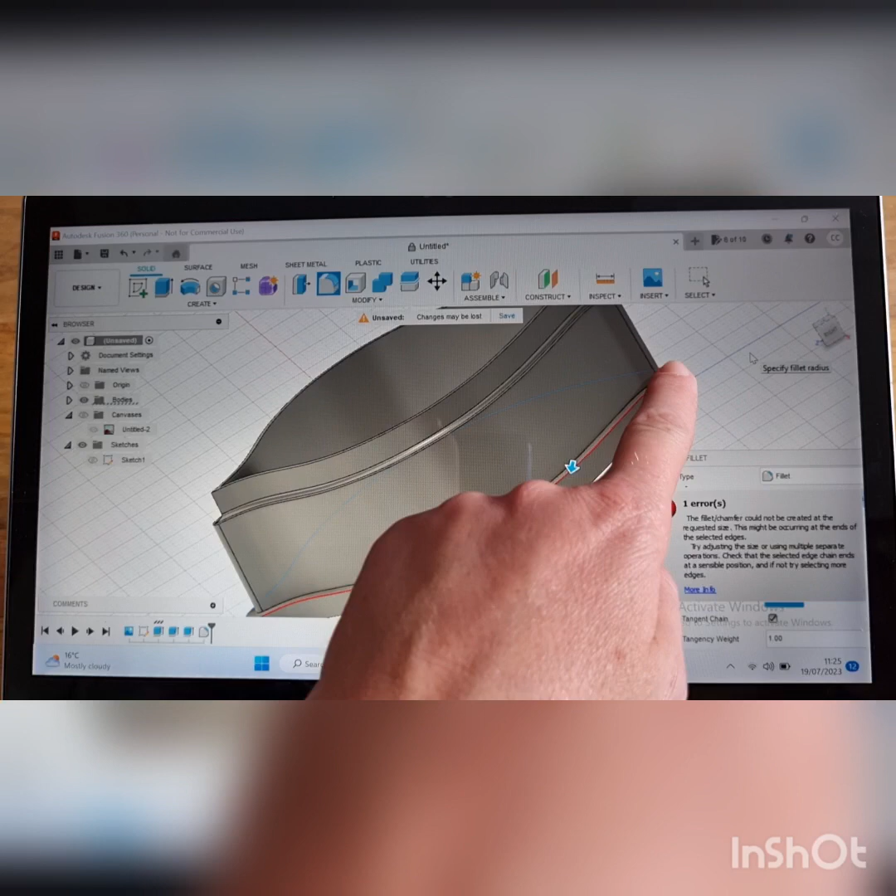Now sometimes it depends on the shape. So I'm just going to have a little scan around with my orbit, make sure it's all - let's get rid of that, go away. Hang on, escape that, we don't want that. Go back to fillet again and see if we can choose. Might just have to move that. So we've asked it for a 1mm fillet, and it doesn't like it. You can see the line is all connected.

So the only way around that is to make the fillet smaller. So 0.9, there we go. Sometimes it just doesn't like being a millimetre. But now you can see we've got that lovely beveled edge, and that's our cutter pretty much done.

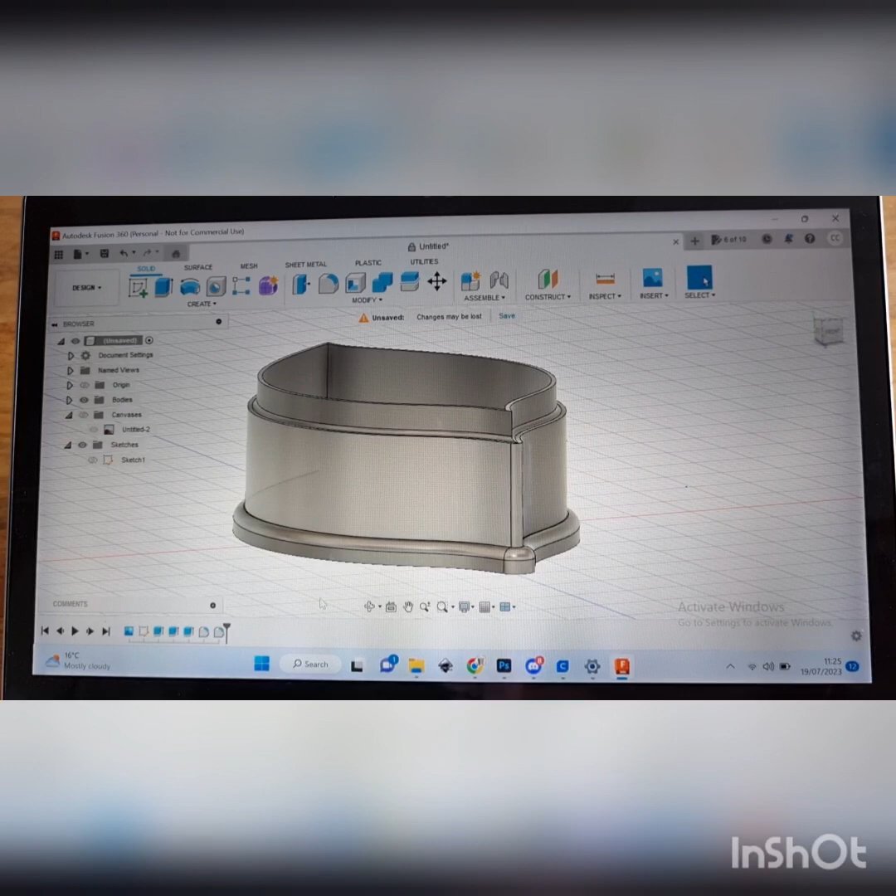So we'll return out of all that. You can see you've got your cutting blade, your wall, your base, and your little support bar across the middle. Now this is ready now to be saved. And what it calls them, which always makes me laugh, is this: they are bodies. So anything you make into a solid is a body.

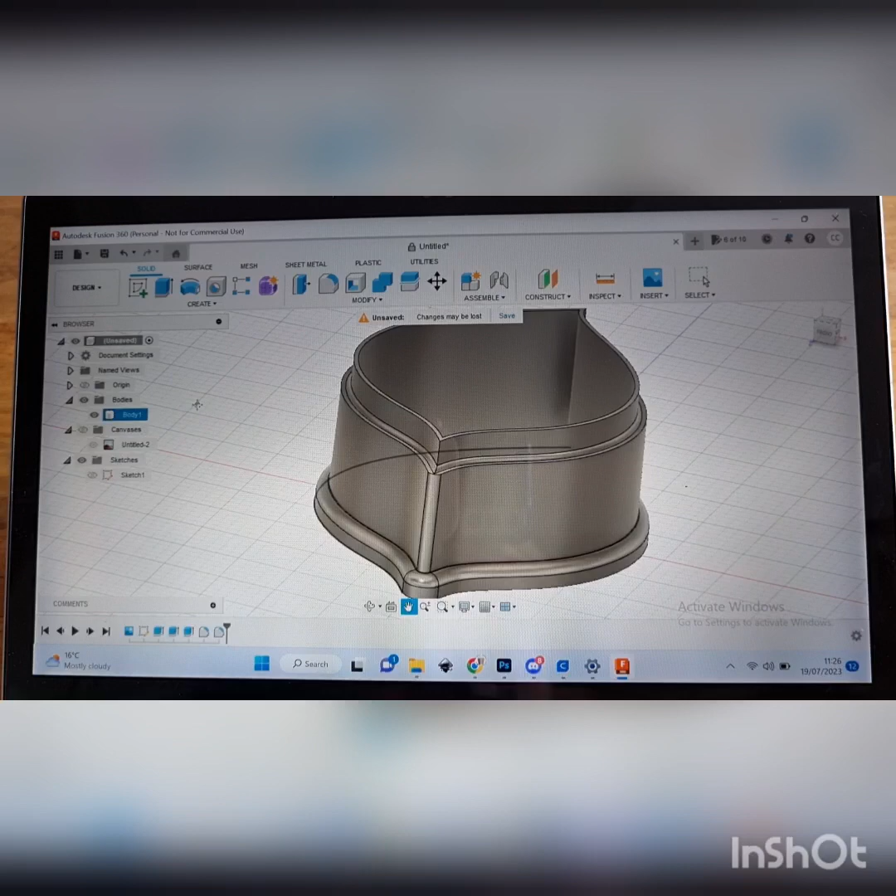And in more complicated designs, sometimes you have to join them all together, but it doesn't matter for this process. So what we're going to do is go up to your bodies tab, right click your body and say save as mesh. You'll get this little bar here.

The format needs to be an STL. I like the refinement to be high, and I don't tend to use the 3D print utility thing because it saves it as an STL anyway, so I like to just go straight to Cura, my slicing software, to get it printed. So press OK for that.

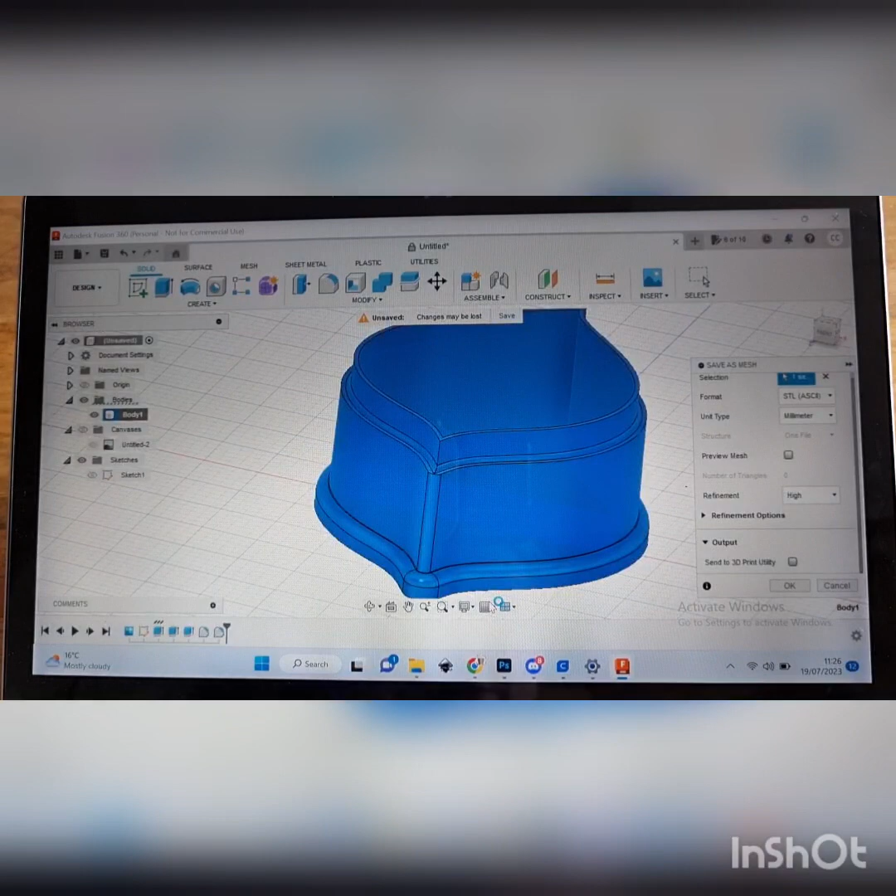You'll get this little section here, but I'm going to save to my computer at the bottom. We'll call it leaf 1, and we'll save that to my downloads. And that is that. Your clay cutter is finished.